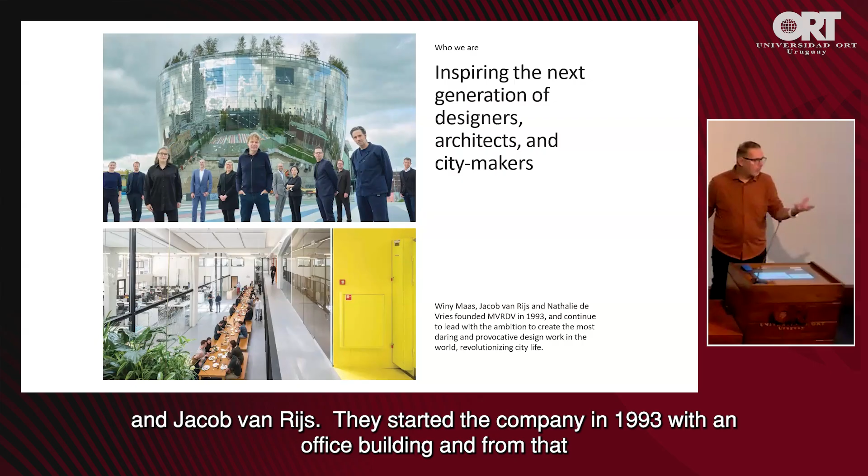MVRDV stands for Maas, van Rijs, de Vries. It's an acronym for the 3 people that you see in the front: Nathalie de Vries, Winy Maas, and Jacob van Rijs. They started the company in '93 with an office building. And from that, now 35 years later, or 33 years later, we're a company still based in Rotterdam.

And we try to design green and innovative spaces, creating happy spaces and adventurous places for an ever-changing world. And we do not only say houses, but we actually work on all scales, from private houses to big urban plans.

And we do that with a large team, of course, with around 280 people from 5 offices. Our main office is in Rotterdam. We have a small office in Berlin of 30 people, an office in France of 20 people, an office in Shanghai of 10, 15 people, and a very small office in New York at the moment where actually only 2 people are sitting. And that's the one that I hope to grow, as I'm working in that region.

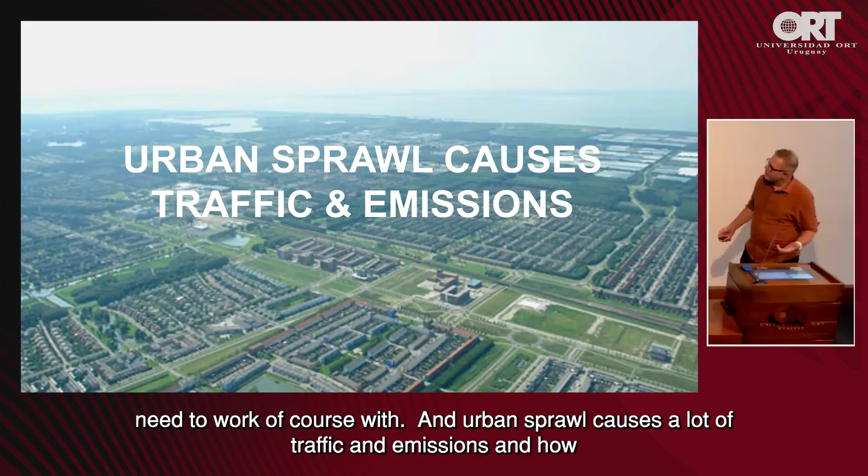Some of our design philosophy: we are founders born in the 70s or in the 60s. So we know about the Club of Rome, where they already said in '69 that we're seeing the end of the resources of this world, and that is something we need to work with, of course. And urban sprawl causes a lot of traffic and emissions, and how can we combat that? We are firm believers that cities are an answer, and we're living in cities, one of the answers.

But of course, that creates density, and it is sustainable, but it's also very stressful. For everybody who read Delirious New York, this is, of course, a very recognizable image, where already there was the utopia of living inside a city but in a different way. And we're thinking, how can we do that, and how can we do it differently?

But we also should be aware that we're working in an industry that actually is responsible for 1/3 of all the CO2 creation in the world. And what can we do about it? Of course, we cannot help it on our own, but it's something that we want to see how can we help. And that's why we're trying to be sustainable.

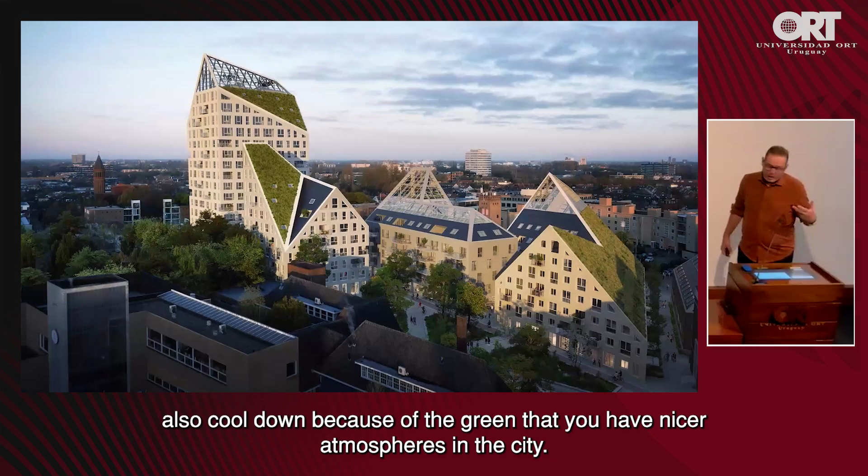We adapted the sustainable goals of the UN. And of course, we as architects, we as builders, cannot do everything, but we can always look at what we can do. How can we make our buildings greener? Can we make sure that our cities become greener so they become nicer to live in, but they also cool down because of the green, so you have nicer atmospheres in the city.

But also looking at the carbon reduction: this is a project that we did in Brussels, Belgium, where by reducing the carbon and changing the structure from a full concrete structure to a hybrid construction, we reduced so much weight that we could actually reduce the piling underneath the building. And with this reduction in piling, we actually saved enough money to pay for the wooden floors, to pay for the hybrid structure. So actually thinking about carbon can also be something that helps you pay for your building.

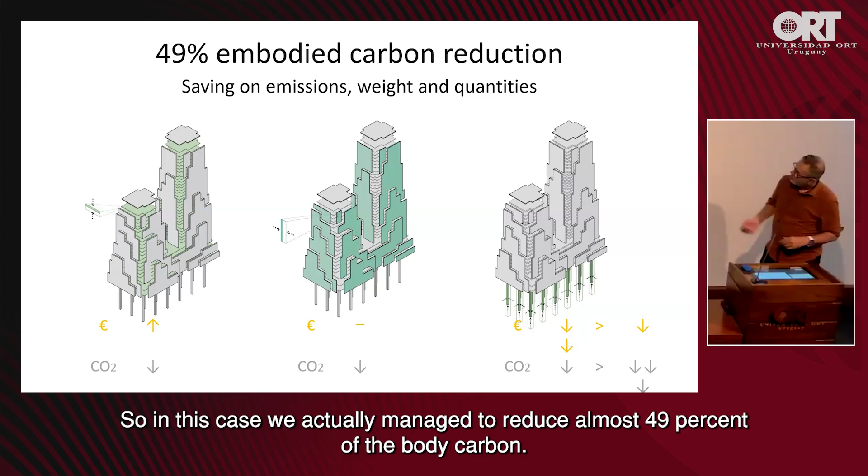In this case, we actually managed to reduce almost 49% of the embodied carbon. And that's why also we have a group in MVRDV called MVRDV Next. Together with them, they do a lot of programming, computer science, data-driven design.

Together with them, we made the carbon guidelines. What we're trying to do is make people aware in our office, where is the carbon? Is it in your floors? Is it in your columns? During the design process, already from the first sketch till the end, we put our design into the carbon calculator. It's a calculator that calculates the amount of carbon in your building, and then you see where you can optimize it.

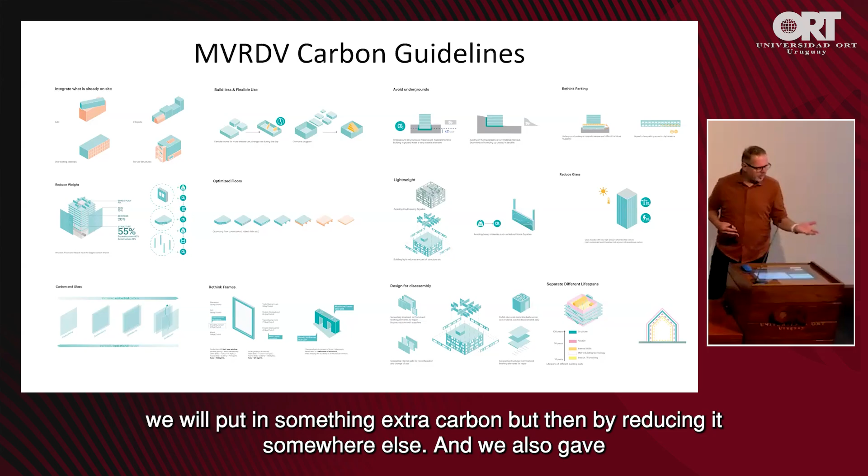Because we're still architects, so we still want to design buildings. So sometimes we will put in something extra carbon, but then reduce it somewhere else.

We also gave ourselves a target. Before 2030, we want to have less than 400 kilos of carbon per square meter in our building. That is also to make sure we reach the Paris Agreement. We're not there yet, we're at the moment at 469. But every year we're going down, and we calculate all our buildings to also track that.

We're also starting to publish this data online, so that everybody can follow us and see how we try to reduce our buildings.

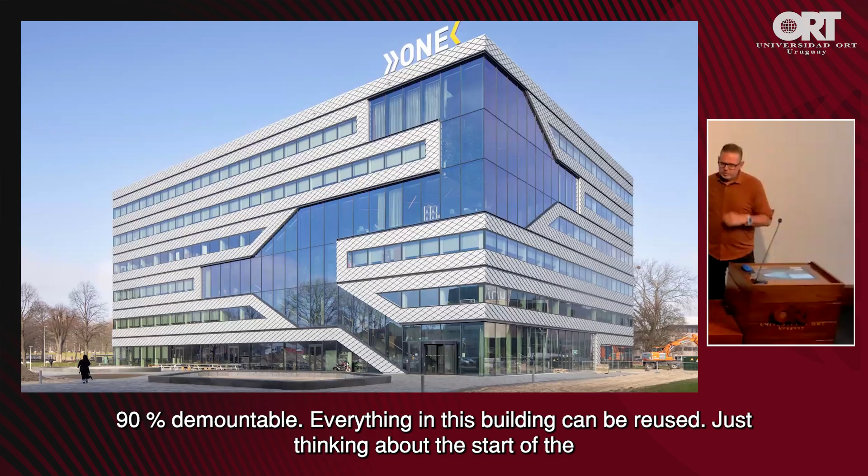Another way we're doing that is, for example, this building is 90% demountable. Everything in this building can be reused. Just thinking about the start of the building, we started to think about, can we use bolted steel instead of welding steel. The floors are actually loose on top of the steel, and they're only held with clamps. The whole facade is screwed onto the building.

All the grid is a standard grid, standard element, so that in 30 or 20 years, when you take it apart, you can actually demount it. It's one product, and you can use it somewhere else in a new building. So already thinking now about what you're going to do in 30 or 50 years with your building, but also with the installation, for example.

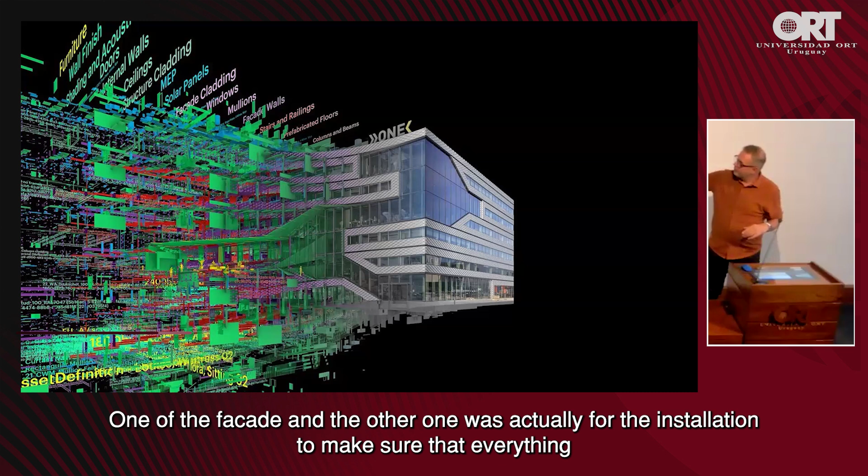This is a laboratory building that can transform into offices and vice versa. We actually made two mock-ups for this building, one of the facade, and the other for the installation, to make sure everything was visible, nicely designed, but also easily accessible, so people could easily change a laboratory into an office or vice versa without constantly having to open ceilings. So from the beginning, rethinking how a building like this works, but also how the lifetime and lifespan of a building works.

Another study we're doing a lot on is resiliency. We did a study for Vancouver, but also for the Bay Area in San Francisco, thinking about how we make areas resilient for water rise, sea level rise. We actually made a small book about that, the Sea Level Rise Catalog, where we put all our information.

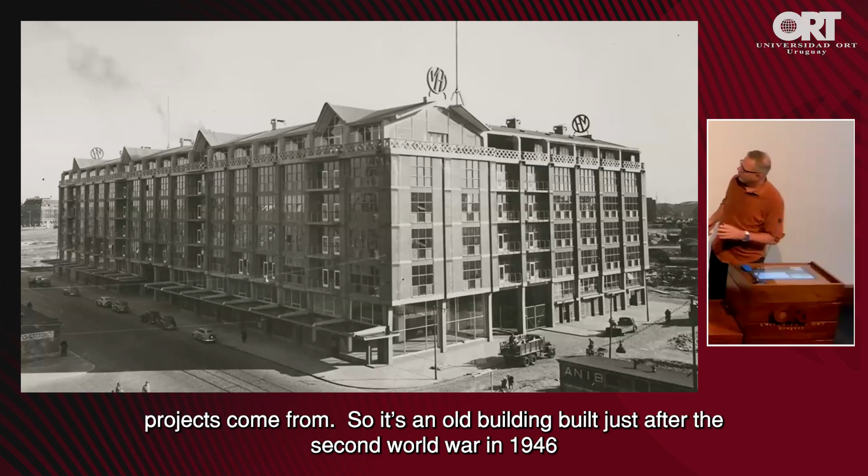So, what is that? We're working from the MVRDV office. I thought it would be nice to show how our office looks, that maybe also explains a little bit where our projects come from. It's an old building built just after the Second World War, in '46, designed by famous Dutch architects Maaskant and Van Tijen.

We're occupying the 5 wide buildings you see in the middle. So it's one big building, a mixed-use building where a lot of small companies were. On the top, there were actually people living in the past that maintained the building. When we moved in, these were actually factory floors, and we transformed it into an architectural office.

So we have 3 spaces. The white space is our working space, where we have our tables where everybody sits, and our computers. Then we have the middle, that's the family space, where we have lunch every day together.

So it's a long table where from 12 to 2 everybody sits down, has lunch, to actually meet each other, to see each other, and to hear what people are doing. What project are you working on? You're doing something in Asia, I'm doing something in the Netherlands. Can we learn from each other? Can we make sure that we exchange?

And to further that, we have this tribune inside our office where every month there is actually a Pechakucha where the youngest student needs to present the project. So if you as an intern come to us, you work on a project, once a month you need to present that project to the rest of the office. What is very interesting, because you're actually being trained to present your ideas, to present the ideas also from other people, because now all of a sudden you're presenting the work of somebody else.

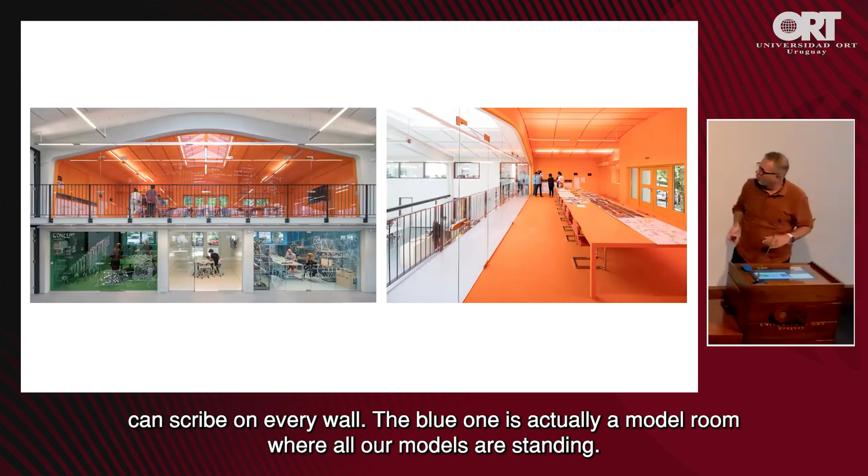So the third zone is the zone where all the meeting rooms are and where all the facilities are, and you see that these are very colorful. Every room has its own identity. This is one of the big meeting rooms, and in the bottom you see the smaller meeting rooms. The white one, for example, is a completely whiteboard, you can scribe on every wall. The blue one is actually a model room where all our models are standing.

And now let's go into some projects. I'll start with smaller projects and grow into larger projects. This is a project that we did in New York, where there's an interesting building next to the Hudson River.

The interesting part of this building is you can drive into the building with your car. You go up in an elevator, and next to the elevator there is your house. We were asked by the owner of this penthouse, and he said, I have this penthouse, but it really doesn't function, it doesn't work. I have my living room on the ground floor, I have my bedrooms on the top, but I have 2 balconies that are connected on the top floor. How can we change this, and can you get rid of this huge stair that takes so much air?

What we did here was really rethink the layout of this apartment, just flipping it. So having on the bottom floor the 2 bedrooms, and on the top floor creating the living space, so that you have a much more open space. And one of the things that we did was introduce a new stair.

So when you step out of the elevator, you walk onto this glass floor where underneath you have the stair that goes down. And you see this glass railing, and there's something special with it, because one of the demands of the client was that I want to have a separation when I have a party between my living room and my private bedrooms. And how can we do this?

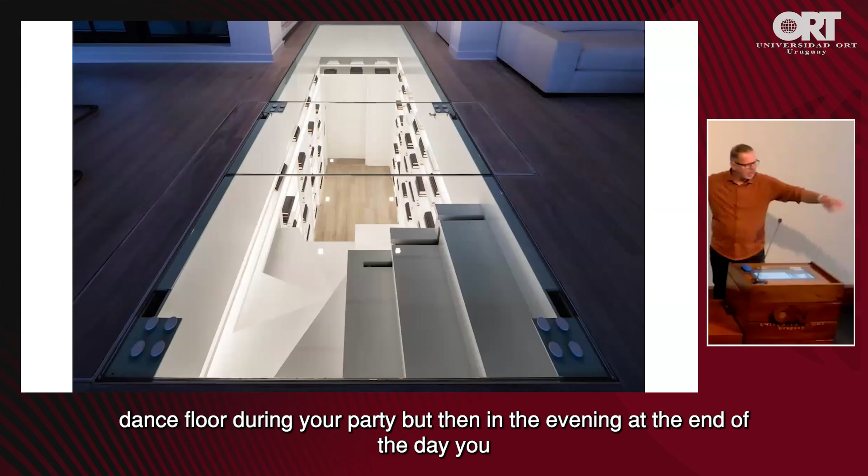So what we actually designed here is that this glass can fold down. So you have a fantastic dance floor during your party, but then in the evening, at the end of the day, you want to go back to bed, you can open it, and you can take the stair down.

And you see here, this is the new living room that we created for him, that is more open, more bright, and connected via this terrace. And then if you walk to the other way, you see the kitchen with a second living room, also connected to the other terrace on the other side. If you go down the stair, you come into the bedroom, behind his and hers clothes. Underneath you have the bath, and then the bathroom.

And then we included also a very small private family room that takes use of this double high space that we made a lot smaller. The idea of this project is really that we were asked, can you rethink the layout of this project? That's what I tried to show in the project we have there, where we were asked, we have a problem, can you try to help us solve this? And that sometimes means thinking outside the boundaries of the current confinement.

That's also what we did here for the Didden Village, a very small project, but very nice, very significant, where we were asked by the owner of this building. He has a workshop on the second floor and the ground floor, and he was living together with his family and at that moment 2 sons in one big room.

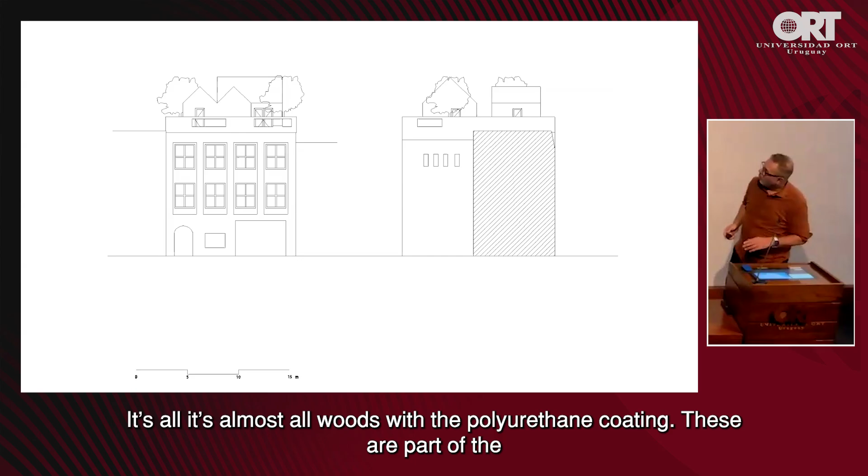And what we did is we actually prefabricated everything. So we made a small extension of this model, and all the elements were prefabricated and were hoisted inside their house, to have a very minimal impact on the city and a very fast construction. It's almost all wood with the polyurethane coating.

These are part of the drawing set that we submitted to the city because we needed to get approval, of course. The only thing that we showed on the drawing was the colour number, RAL 5015. We didn't show that it was actually sky blue. So the first time that we started putting stuff on the rooftop, people in the neighborhood were like, why are you extending the house with a blue rooftop building?

The nice thing is, a year later when we came back, everybody loved it. It became part of the neighborhood, and this changed the way people were thinking about their own rooftop. People were now actually living on or doing stuff on their own rooftop. And we cleaned up the house.

So you see, this is now the ground floor, and this is one of the two staircases going up. This is the staircase for the children that has not only the two staircases, but also the hidden part for the children to climb and slide down. It comes up in their small house with two rooms.

Then, later, they move downstairs or move on. They have the beds, and because they were always living together, we wanted to make sure that in the evening they still could have contact. So we also made two windows that could open to each other, so if they still wanted to sleep next to each other, they could actually crawl into each other's bed.

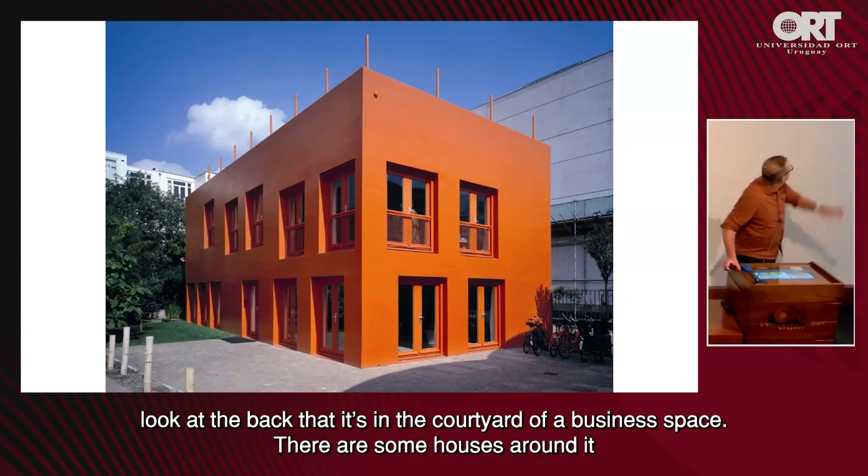I said no problem, because this was also, if you look at the back, in the courtyard of a business space. There are some houses around it, and they started complaining. They really hated the orange, and said, I cannot live in my house anymore. Every time I look outside, I see this orange monster.

We actually came on national TV. They discussed this project, and it was quite an outrage for such a small building. And then we said, okay, we can change it, not a problem, but what do you want then? What kind of color? So we did a survey, and people could choose.

Not unanimously, but they chose, let's turn it into green. And everybody was happy with this, because somehow this worked with the neighborhood, it worked with the plants around it, and this is what the neighbors chose above the orange.

On the ground floor you have the studio, and then if you go up, you have the house with the living room on one side, and on the smaller side the bedroom, and then on top a nice outdoor space, and around it a nice space to play outside, also for the children, but also for the people in the studio.

Another small project is where the client came to us and said, I want to have privacy in my villa. I want to have a villa, but I want to make sure that nobody sees me, and I want to have a lot of glass.

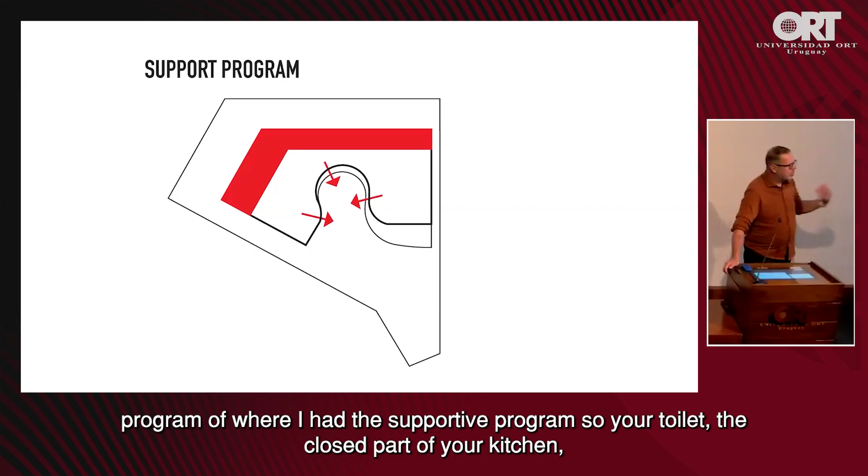So we said, yeah, okay, that could be. What we could try to do is close the outside wall, and first have a program of the supportive spaces. So your toilet, the closed part of your kitchen, your entrance, your garage, we all put that on the street, and then we open it on the other side.

So this is the plan that you see. You see the wall with all the utilities inside, the garage, and going up you have the bedrooms. From the outside, this was of course a huge discussion point, because the city said, look at the other houses, it's all fake, but it's all in the style of the 20s, so why can't you do this?

So we actually provided a lot of modern architecture from the 20s that were also just with a flat roof, not a pitch roof, with simple brick work from all over the world. And the city, in the end, said yeah, okay, we understand. So they approved that we could build this.

So we actually, there's only one window, and then this Brazilian lattice brickwork that also hides a window. And in this curved wall, there is a door. So you move in here, and then you step into this wall, and through the wall into the living space in the library.

And then you see that this house is actually concentrated around an olive tree of 400 years old. The client was Greek, and she really wanted to have this olive tree. That was her pride and joy, and that needed to be the center of the house. So the glass really curves around it, and it's closed on the other side, but it's really open on the inside.

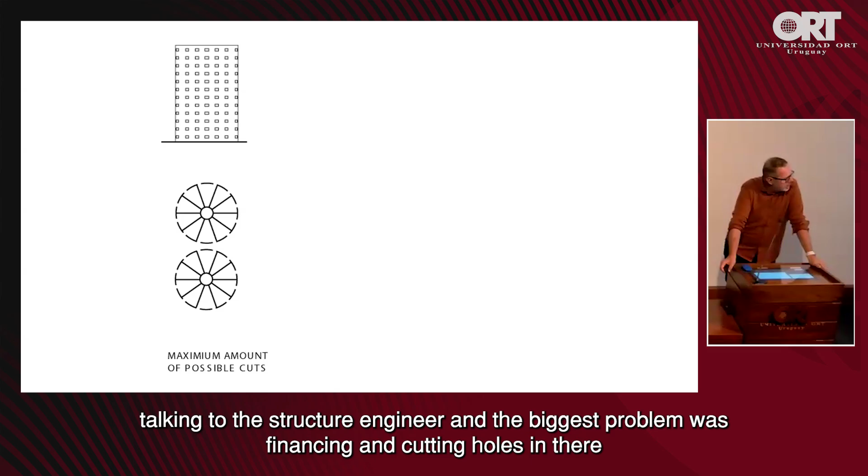But we started talking to the structural engineer, and the biggest problem was financing and cutting holes in there. We could only do very small holes, and if you look at the amount of square meters we could make inside, they couldn't afford actually cutting those holes. These walls are a meter thick, so expensive that you would get portholes, and that wouldn't work with the housing inside.

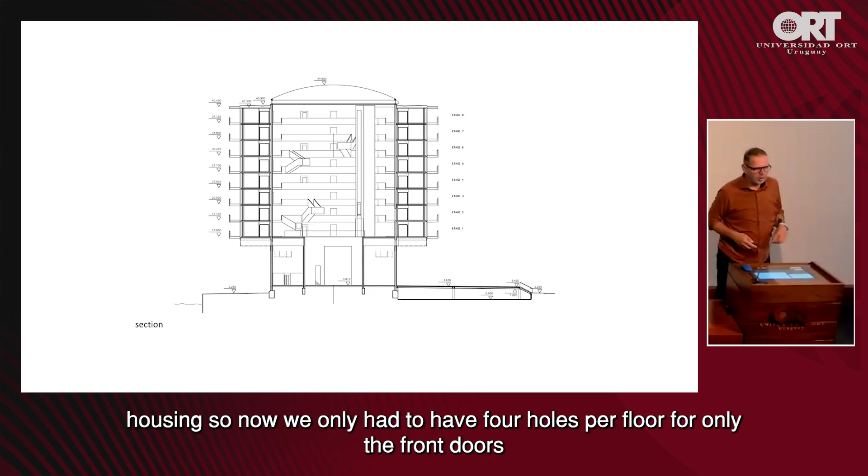So we thought, okay, can we not turn that around and try to flip it to the outside. So what we did is only make a couple of holes on one level where we stick out beams through the structure, and on these beams we actually started building the housing. So now we only had to have 4 holes per floor, just for the front doors, because we made this fantastic ring of housing around the buildings that were just hanging on this concrete building.

And then we could actually make more square meters, nicer square meters, because the nice thing about this was that all of a sudden it's not a small window, but you can have a full curtain window for your house. And you have this fantastic, nice living spaces. So they could also rent or sell these houses for a much higher price.

So actually the project almost paid for itself. And as a bonus, we got this fantastic interior space for free almost.

Another project is Silodam Amsterdam, and it's actually nice. So, does anybody know this ship?

Then the question is what has this to do with housing, and especially the Silodam. This is the Silodam. As you see, it's on the water, so that maybe helps a little bit. It's built in 1995, started construction in 1994, 1995. The whole idea of this building was that it's almost like a ship of containers, and every container is like a mini neighborhood. What we did is, before we started talking to the client, we designed mini neighborhoods with different types of housing.

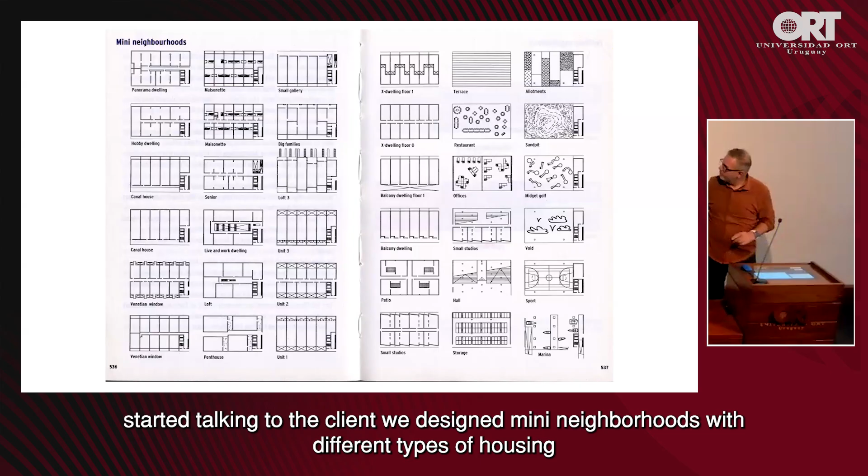We came to the client and said, looking at your wishes for square meters of apartments and the differences you want, and also wanting this mix of affordable housing and condos, social housing and condos, how can we do that? By having this mix of different units, we could work on this.

Every time the client said, no, I don't like these apartments, let's take them out because they don't bring enough square meters or they're too big, we could bring in another block instead.

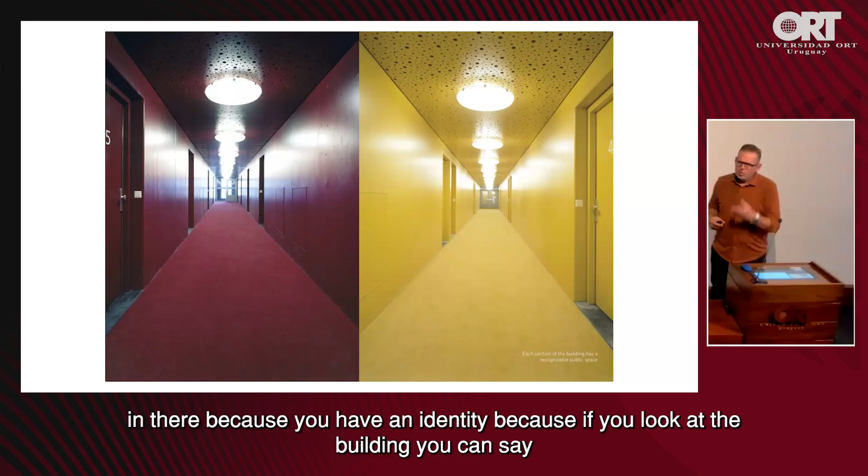Every block also had its own color, its own facade, and its own interior corridors. This way, everybody feels at home because they have an identity. Looking at the building, you can say, I live in the orange block, or I live in the red one.

The big advantage is that inside the building we now have houses ranging from almost 50 square meters to 200 square meters, so we have a bigger range. It's not only social housing, it's also a five-room apartment.

We also have different types of connections toward the front door. This one is a gallery entrance, leading to a bigger house of 120 square meters. We have smaller ones around 50 square meters. All kinds of different houses, different layouts, different amounts of bedrooms.

Another thing we did, which I think makes it really special and very flexible, is that we have a couple of concrete walls, but for the rest we just have small concrete columns.

What we tried to do, though we didn't manage it 100%, is put all the electricity and switches in the concrete elements, so that all the walls in between can be flexible. You can take them out, remove them, or remodel quite easily.

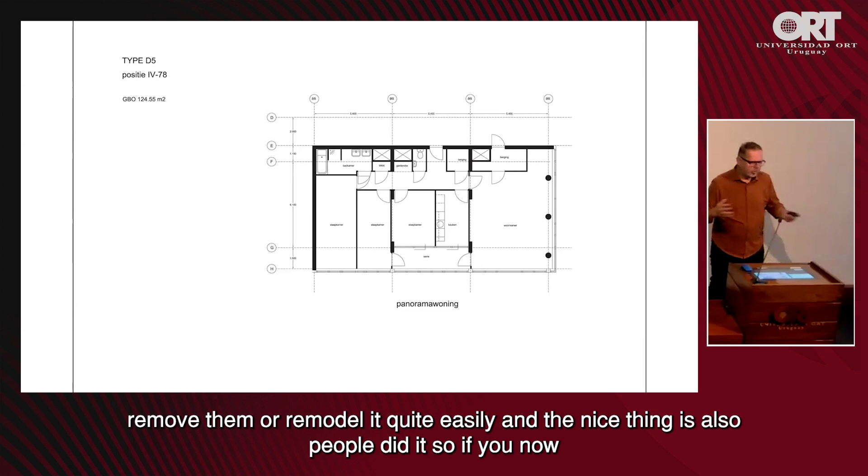The nice thing is people actually did it. If you go there now, except for one group, an elderly group living in rental houses whose homes are still the same, all the other houses have been changed. Walls have been taken out, people put in bathrooms at other places. It's really interesting to see how giving different facades, different options, and different apartments made people start living differently inside this building.

As I said, it's on the water, and you go in via the stair onto the building, and then on the other side, one of the blocks is sticking out of the building. But that still doesn't explain what this has to do with this building.

We started building this in '94 or early '95, and one of the first things the contractor said was, we have to sail Amsterdam in '95, meaning whatever happens, I want this part of the building finished.

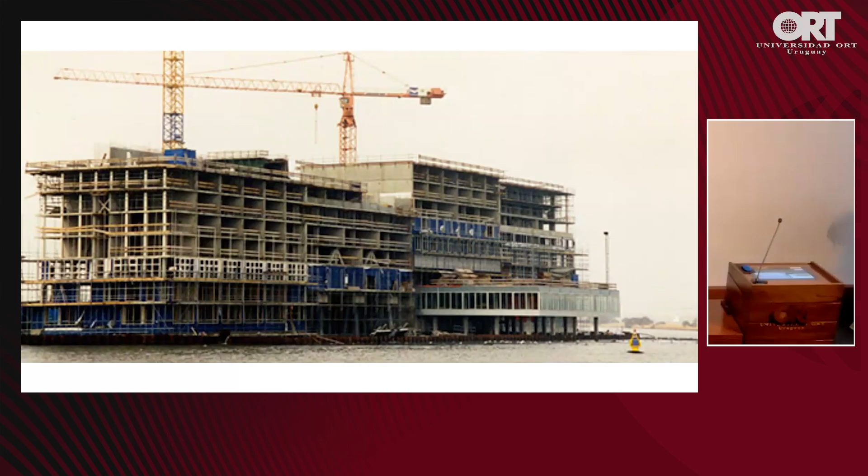Sail Amsterdam, I was just there two weeks ago, and that's where I saw the Captain Miranda. It's an event every 5 years where 50,000 boats and 24 tall ships enter Amsterdam, from IJmuiden to Amsterdam, a week-long event where all these ships sail into the city.

It's a fantastic idea, and the client thought it was also a fantastic opportunity to host all these people on this building site. That meant we started thinking, all of a sudden this isn't just a viewing platform, it becomes an event space almost. Maybe we should do something about it.

I'm glad we did, because I was there last week, and you see this is the building, how it looks now. It still looks fantastic, but they used every square meter of the building as a viewing platform.

Especially on this platform, at a certain moment, since I still have contact, I got a phone call from somebody asking, do you think this is still okay? Because there are so many people there, won't we have a problem? I said no, we knew this was going to happen, so we took care of it.

It's interesting to see that because of a location or an event, sometimes we have to think ahead, because things like this can happen, and you make sure it's also a safe space. I must say, we didn't count on so many people on the roof.

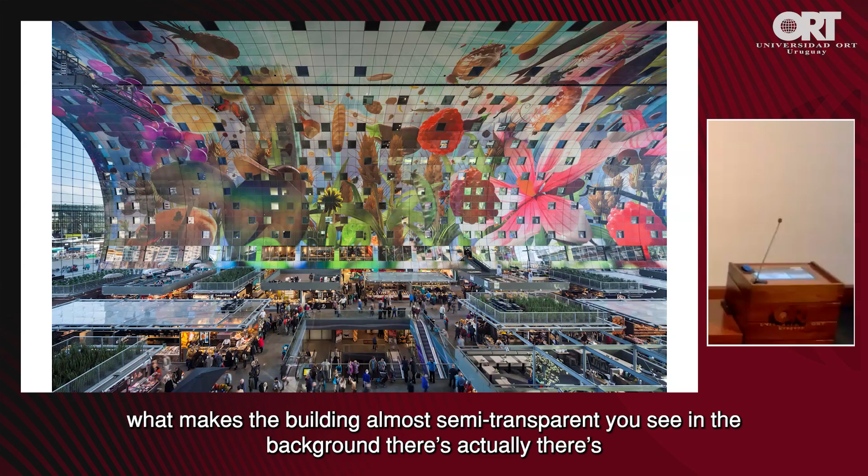The inside is covered by this huge mural artwork, the cornucopia, that represents where all the wealth comes from, all the fruits. The nice thing is you see shrimps that are 400 or 500 times enlarged, you see flowers, but also if you look closely, it makes the building almost semi-transparent. You see in the background there's a crane standing there, and that represents Rotterdam, that's always in development, there's always new buildings coming.

But you also see lines that represent the floors and the walls, because behind this mural are actually what makes it the market hall, the houses. So in this building we have 228 houses, where half of them are rental and half are condos. And they have one side that looks outside, and the other side that looks inside.

And what we did is we looked at it and developed four types that repeat each other and then step back. Sometimes they stack, and sometimes there are small differences to make the facade a little bit more interesting. But basically it's just these 4 blocks that constantly repeat.

That means people can look on the outside, but they also can look inside the market hall. In the beginning, we actually wanted these windows to open, so that you could really scream downstairs, 'Can I have something?' and they put it in your basket. Luckily, the client didn't allow us, and that's good, because now when you're in your house, you don't smell anything, you don't notice anything from it. You can look at it, but you don't have the pollution or the smell of it.

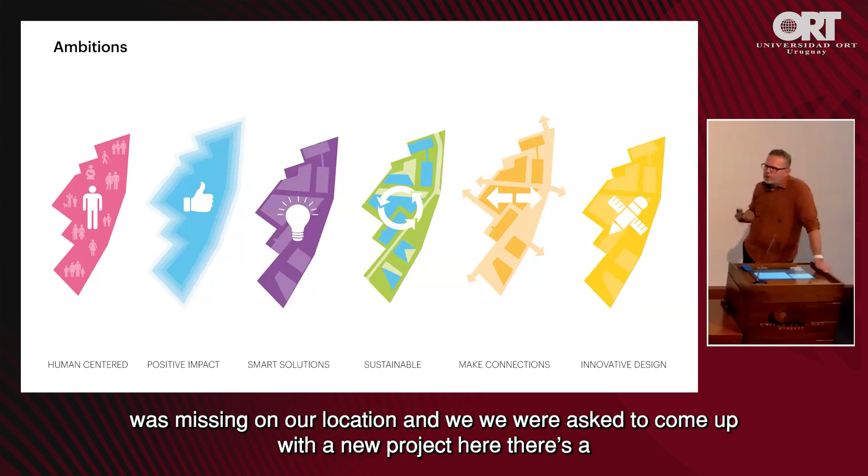It was a competition that we presented. So we looked at the ambitions that were there, we looked at the urban structures. But one of the things we wanted to do was make a very nice urban life. So what we did here is try to have as much daylight on the street as possible. We looked at the sun angles and cut the roofs 45 degrees so that we lowered the buildings at the street levels and have more daylight on the streets.

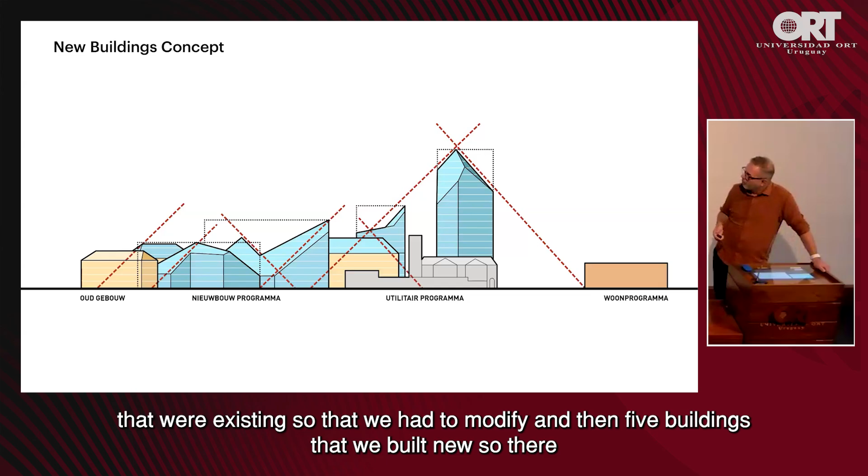That has an effect on the building volumes. So number 2 is what you could build, but if you start cutting, then you end up with building 6. We did that for all the buildings that we could do there. There were 2 buildings that were existing, so we had to modify those, and 5 buildings that we built new, so there we had more liberty.

Half of the roofs that we created are solar, and the other half are green, adding this element of green inside the city again, with the benefit that we lowered it so much that you have daylight in the streets. In these small streets it feels like the houses are not that big, but from a distance you see that there are bigger volumes. And from the other side, you see all the green roofs that we're creating.

We're almost done with this. These are 2 of the buildings that we renovated. Did the whole interior. Ground floor is going to be retail, and above it's housing. We recreated the passerelle that was there between the 2 houses, which is also the entrance to the two houses.

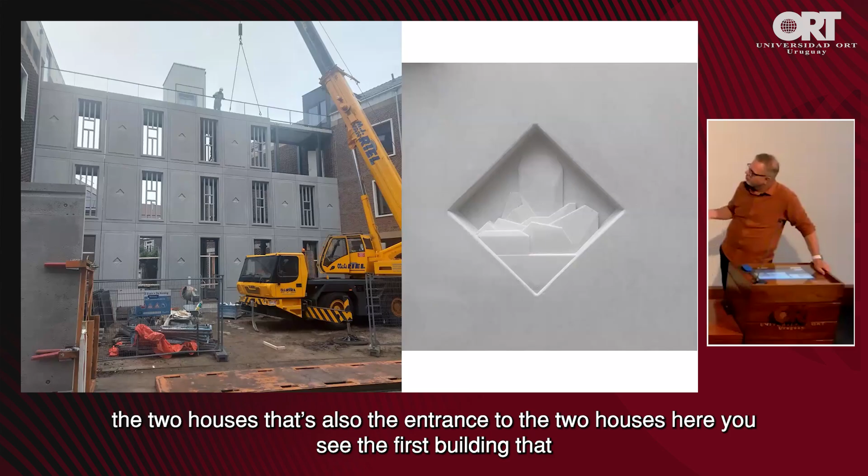Here you see the first building that was delivered a year ago. So we first did the first 3 buildings. This is the roof, the green roof.

This was after a year, so you see now that the plants really came alive. When they first put on the roof, you're like, oh, this is not what we agreed upon. But yeah, it takes a little bit of time. They need to grow the plants, but this is how it looks now. And before the end of the year, we hopefully we're done.

The Valley, it is in Amsterdam, and this project was really on the edge of the commercial zone, the office zone of Amsterdam, and the new housing. Our building is a mix, so there's housing in it, offices, retail, restaurants, and we thought, how can we work with that? So this was the base volume that we got, 3 towers on the plinth.

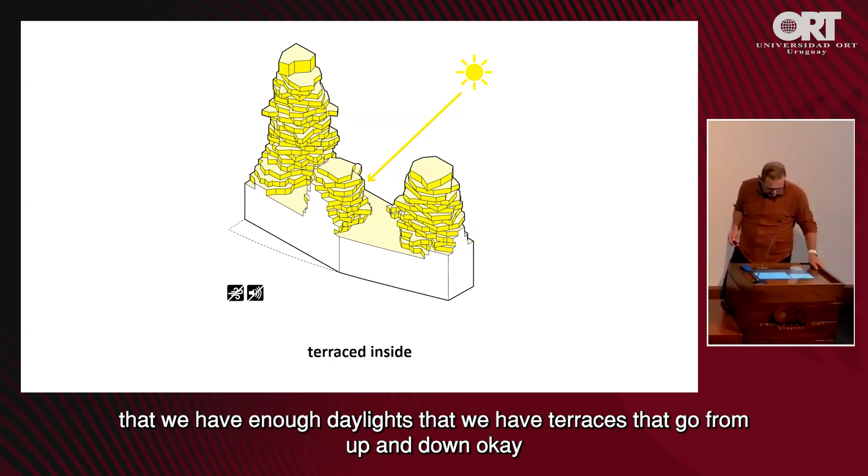We said okay, on the outside it matches the offices that are there, but on the inside we should start breaking it down and start creating terraces for all the apartments that are there, making it feel like a housing block. And also making sure that we have enough daylight, that we have terraces that go from up and down.

That we have an active plinth. We created a grotto that combines everything, and one of the nicest things that we did is we actually made a public route that goes over the building all the way to the top and down again. And this is a public route that is open 24 hours a day, where people can just walk up in the building. And then also we have a sky bar.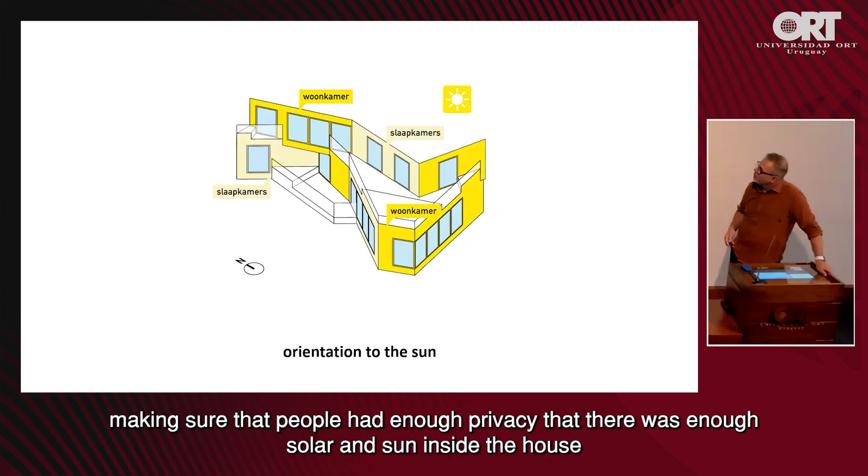But the nice thing about it, of course, we want for the facade, we wanted to create diversity, quality for all these houses, making sure that people had enough privacy, that there was enough solar and sun inside the house. So that had to do with the windows, but also the orientation of the moves of the facades. We are next to a highway, so we also want to make sure that we would block as much sound as possible, really creating this nice environment where people could live.

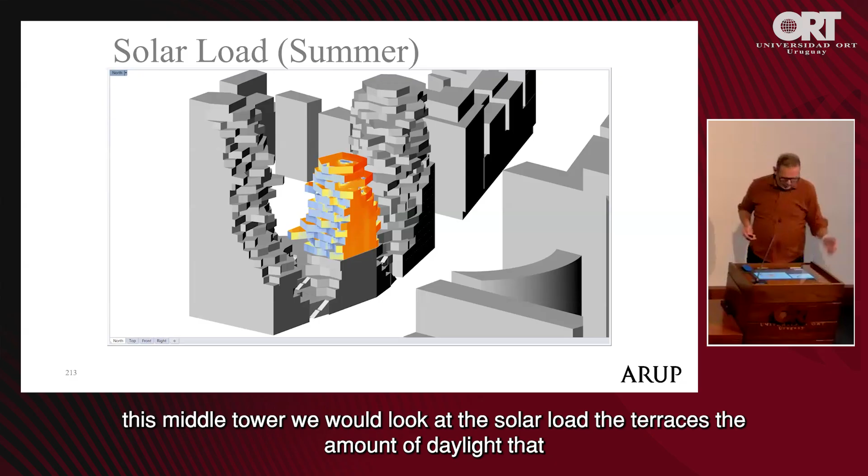So with this project, we did a lot of scripting, parametric modeling, what we now would call AI, but parametric modeling, where if you look at this middle tower, we would look at the solar load, the terraces, the amount of daylight that went in and out, and we did a lot of tests.

We did really a lot of tests, and the colors, this is then generated by the computer. The colors tell you how good or bad something is. So the redder it is, the lower the score, the greener, the better the score. So with this, we could actually quite easily optimize all these angles for sun, for solar, for wind, all these elements. And that led then in the end to all these plans for the first tower.

And we did it for all the blocks, interlocking of course. And that created then in the end this block. This is on top of this route, that is this public route is there. You see the 3 towers, but you also see the facade.

And the nice thing about this natural stone facade, actually, it's a waste product. If you look closely at the facade, you see that it's not homogeneous. It's something that we liked and we chose for it, but this was because the stone was not one color, there were small holes in it, different colors in one stone. We got it actually quite cheap because they were going to recycle it and put it under the roads, and we turned it into a facade. And also here we looked at parametric modeling to optimize this facade.

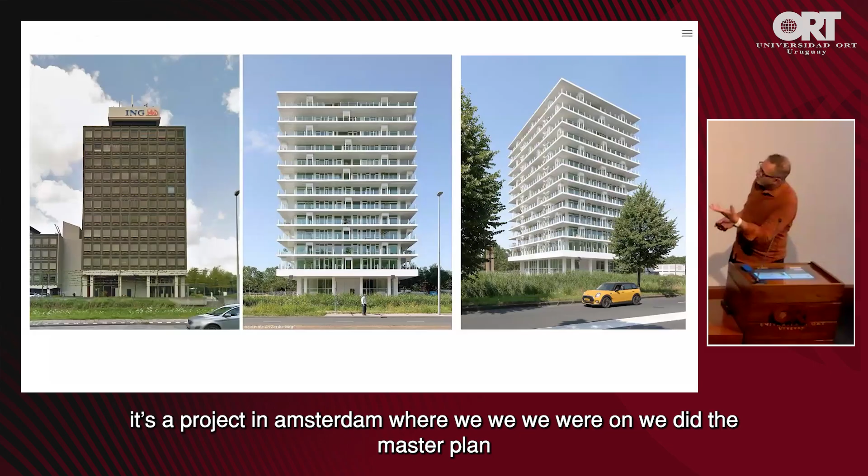Maybe I skip this one for a moment, because it's a project in Amsterdam where we did the master plan. We renovated this building, and we built a couple of new buildings.

The nice thing was, and this is again rethinking the question of your client: there was a design already of 4 different architects, 7 different buildings, but the time changed and they couldn't afford it anymore. And then we were asked. They already had a plan, and they said, okay, we do just 5 buildings, 6 to 8 apartments per floor, very efficient. Can you redesign the facade? And we said, yeah, that's nice, but what is your question?

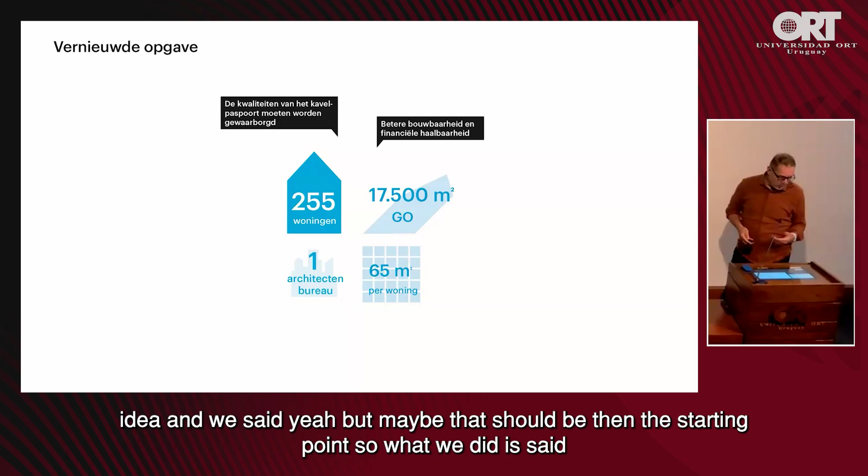What do you actually want here? And he said, yeah, no, this is the program. We want 65 square meter apartments. We want to have 255 apartments, and we want to have as many corner apartments as possible because that will actually rent out easily. So that's the idea.

And we said, yeah, but maybe that should be then the starting point. So what we did is said, okay, what if we just make corner apartments? Make a small block, four apartments per block. Cut them open so that becomes your corridor, where the stair is, where the elevator comes out, where you go into your apartments, and we can still do something then with the building.

So we give the window frames different colors. We work with the balcony so that they look not all the same. We add French balconies not only for sound but also to break up these facade elements.

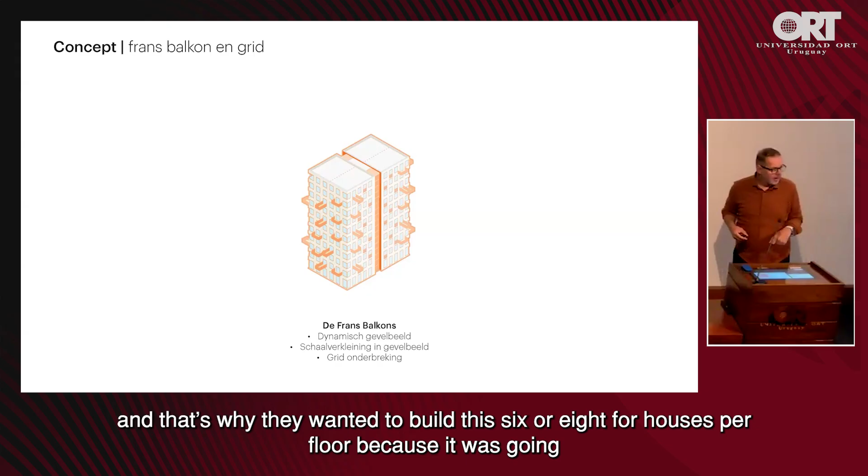The other thing that we needed to work with was a very low budget. That's why they wanted to build this 6 or 8 houses per floor, because it was going to be cheaper and easier. But by actually designing one building and repeating it 7 times, we came out fractionally higher than the original budget, but the quality of the houses was so much better that looking at their investment model, by renting this out, and this is also what they're going to own for themselves, in the long term, this is just a much better product that they can rent out much longer.

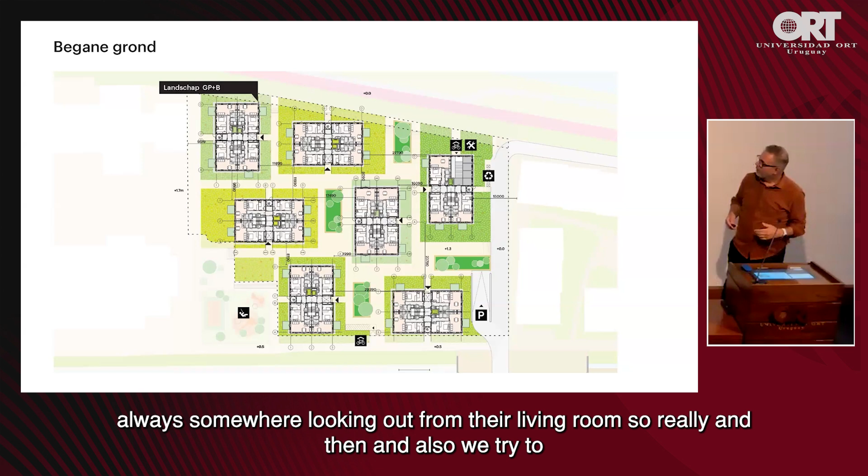All the houses have quality, doesn't matter if you're in the middle, they actually have a long view, always somewhere looking out from their living room. So really, and then we try to optimize actually the space around it.

Because this is an investor park, it needs to be green. We try to make it the greenest plot as possible. We work with a landscaper. I will skip this for a moment. That's also interesting, we work with a group specialized in...

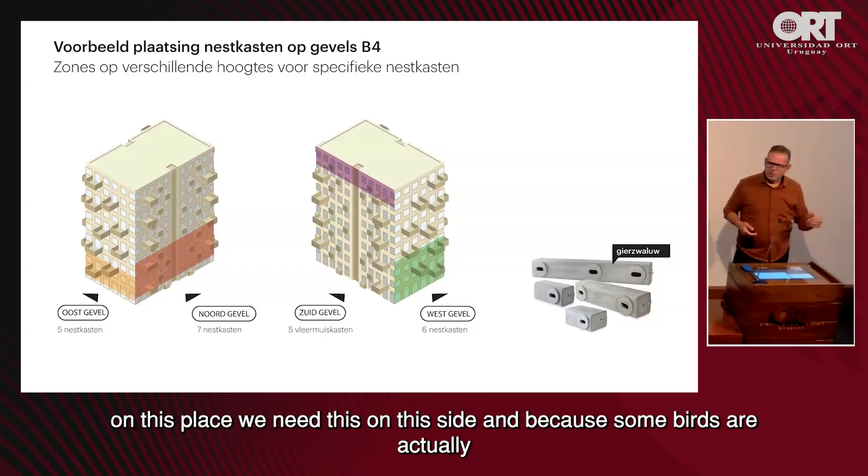Fauna and birds, because we as architects of course know how to integrate elements, but where do we actually put these birds? Where do you put the swallows? So we work with a specialist who told us, okay, we need this on this place, we need this on this side, because some birds are actually solitary, they want to be alone. Some birds want to be together.

And to make sure that all the buildings are a little bit different, we chose 4 different bricks in 3 different patterns, and then different colors for the window frames, therefore making all the buildings a little bit different, but also still the same. And that's why we could make them affordable and easy to build. So this is how we presented it to the city.

And this is where we are now. If you look closely, you see here all these grey boxes that are actually bird houses, bat houses. They're all integrated into this facade at all the different levels. So really trying to optimize it, not only for people, but also for animals.

Okay, I need to skip this, otherwise... This is a project in Boston for the Research Enterprise Campus housing.

This is a nice project also, because this is something you don't see that often, and that is where our client was actually the Giants, the baseball team.

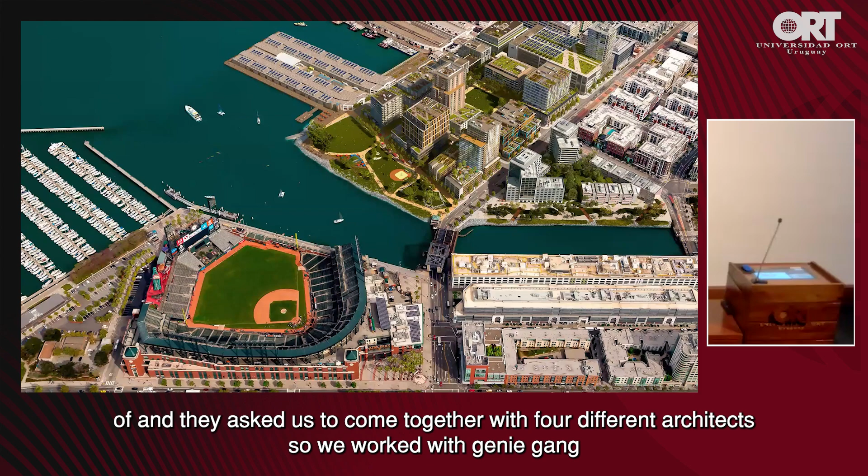They asked us to come together with 4 different architects. We worked with Jeanne Gang, WORKac, and Henning Larsen from the beginning on 4 different buildings at the same time. Instead of just designing on our own, we came together and worked in a studio in San Francisco once a month for a couple of days, talking to each other about each other's design commitments and goals on how we can improve this neighborhood. We turned that into a booklet, which was the starting point for our designs, but also for the other buildings that will come later.

We looked at how to make sure our buildings talk to each other, making sure our buildings are part of the same whole. For example, if I need a loading dock and you need a loading dock, let's put them opposite each other so that we minimize the impact on the street, making the street life better.

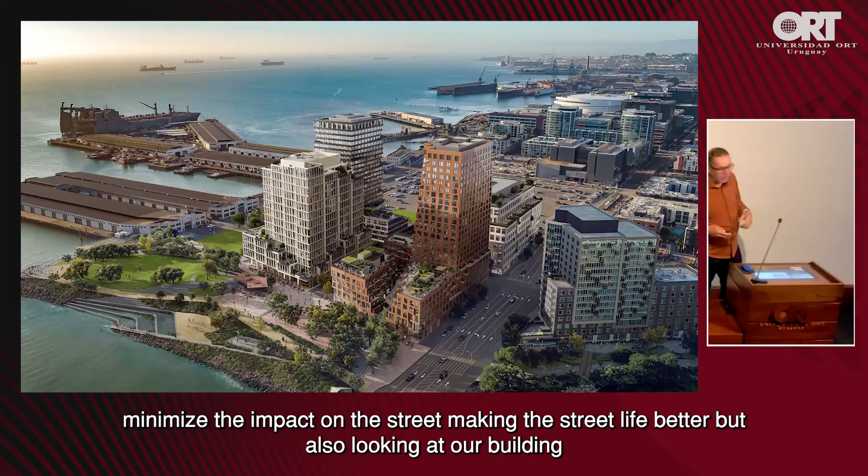But also looking at our building, the first block there - it's quite a big block, and we needed to do housing and offices. But of course, I cannot do housing in a plate this big, so I needed to carve it out so that it would actually have daylight.

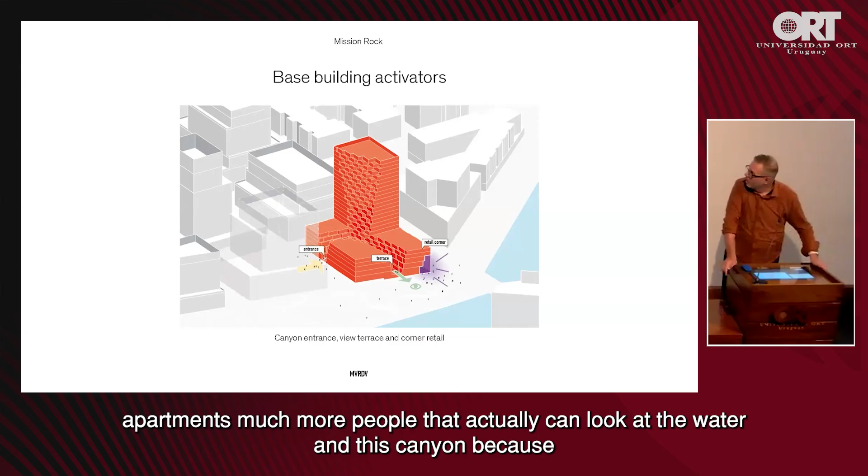I changed the tower because I didn't want to have the standard podium and slab on top of it. So I carved the tower so that it connected better, and it actually gives more views to the water. It also creates bay windows, and the nice thing about these bay windows is that instead of 4 corner apartments, I now have much more corner apartments, much more people that can actually look at the water.

And this canyon - another thing we found out is, if we're creating this new neighborhood, can we optimize the way we think about all the MEP? So in our building, we have the hot and cold water plant that uses river water to heat and cool all the buildings. Underneath this canyon there's the whole plant providing hot water for all the buildings, and the building next to us has a black water plant.

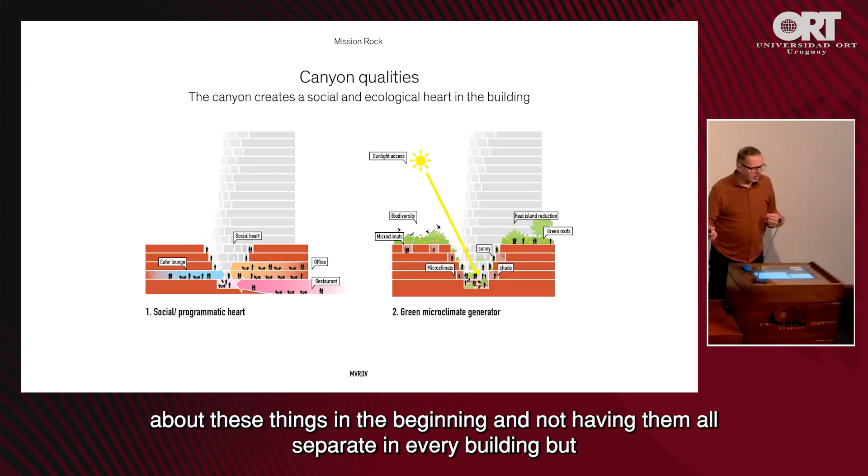All the toilet water goes there, is recycled, and then used for the plants in the neighborhood. By thinking about these things at the beginning, instead of having them all separate in every building, but concentrating them, we could make them cheaper, but also really work together with each other to optimize it.

So this is how the canyon comes down. And then for materiality, we really looked at the buildings in San Francisco, the colors, because we needed a darker or warmer palette. That's what we agreed among the architects, and we came to this GFRC sample.

Now here you see the building, and how it's now perceived from the ball game. The nice thing, of course, is this fantastic building on the water. Next to us is the Henning Larsen building, that's the office, and behind is the green building from Studio Gang.

That's also residential. How you approach this, you have the canyon where you also have the daylight coming in. The fantastic views from the top inside the ballpark are of course a fantastic bonus. And this is one of the shortest ways to get to the beach in San Francisco - literally a 5-minute walk.

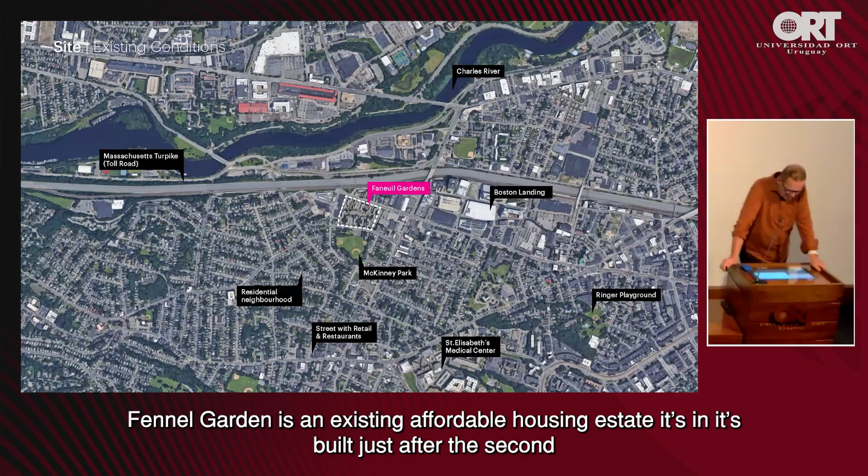This is a project we're doing in Boston, Faneuil Gardens. The nice thing about this project is that Faneuil Gardens is an existing affordable housing estate, built just after the Second World War for people that came back from the war. But in true American fashion, they just stamped houses out of the ground, every block the same.

This is really at the moment a neighborhood where the people living around it know it's there, they find it important, but they don't go in. That's just not what you do.

If we went there and started looking at who actually lives there, you see there are 258 households, but 74% of these households are actually single families with children - mothers with children, a lot of Hispanic people, a lot of black people living there. Then if you look at the social context, the average household income is way less than the people around them.

You also see that reflected in the rents - people pay 30% of their income in rent, so if you don't earn anything, you don't pay anything. But we tried to think about how we can turn this around.

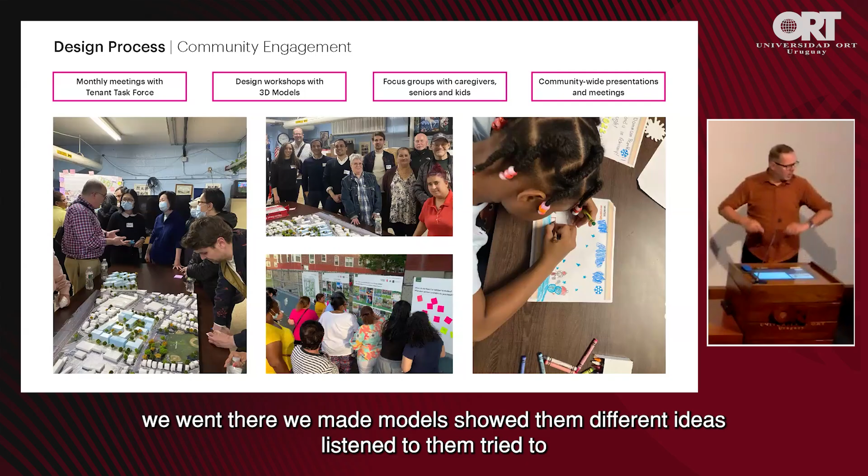One of the things we did is we went there. We made models, showed them different ideas, listened to them, tried to find out what they wanted. We made drawings, thinking about the good things and bad things of the current neighborhood, what they liked, what they didn't like.

With this, we created mood boards, we created ideas for them, communicated them, and let them design with us what they wanted. One of the big things we saw is that they want a connected neighborhood. It needed to be engaged with the bigger neighborhood around it, inclusive, resilient for change, and a future-ready community.

What we did is, seeing how many children and how many old people live there, we said let's make safe spaces. So we moved all the cars that were in between the buildings to the side. All the parking that was there moved to the side.

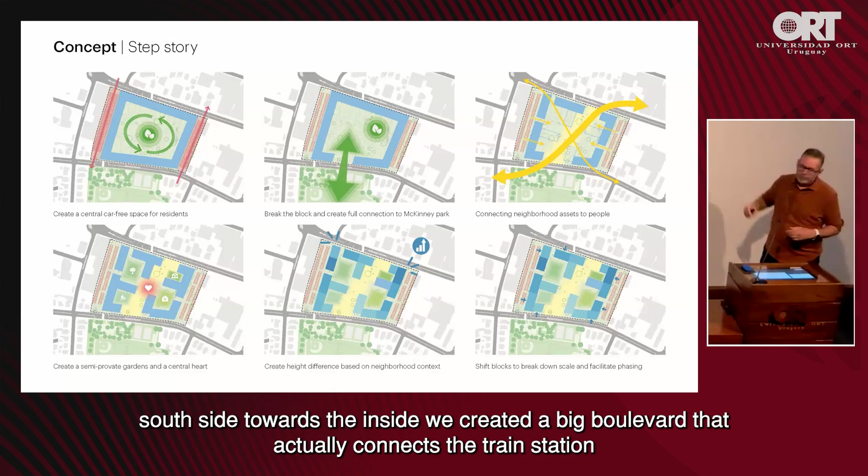We connected the park towards the south side, towards the inside. We created a big boulevard that connects the train station towards the neighborhood. This is now, or will be in the future, the fastest connection from the neighborhood to the bus station and to the train station. But we also tried to make it an attractive route.

So we went from the existing situation towards this. We are doubling the amount of houses. We make a fantastic connection. And we moved all the cars to the outside.

We also thought about the height. So on the train side, it's higher than on the small housing side.

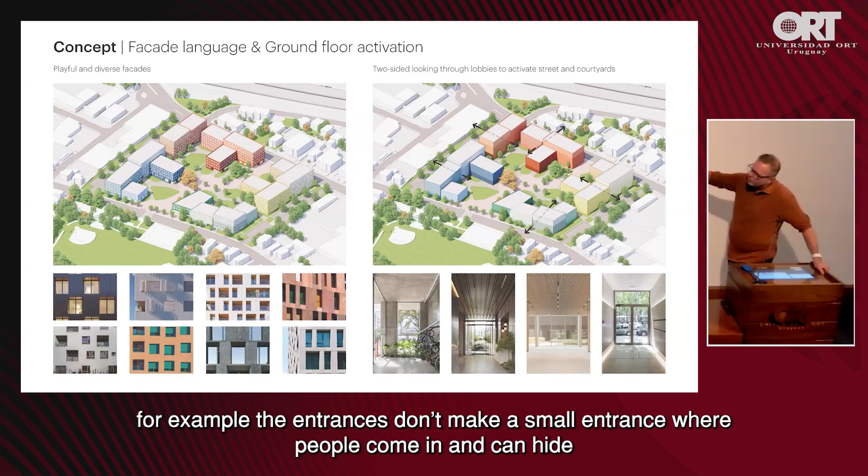We looked at colors, we looked at how windows could look, but we also made rules about, for example, the entrances. Don't make a small entrance where people come in and can hide, but make entrances that go from one side of the block to the other, so that daylight comes in and people see and meet each other.

That's very important. But also make sure that on the ground floor you have houses with a door to the outside instead of needing to go through a corridor. Why should they? They could just walk in from the ground floor directly. And make sure you make nice parks in between where people can meet and come together.

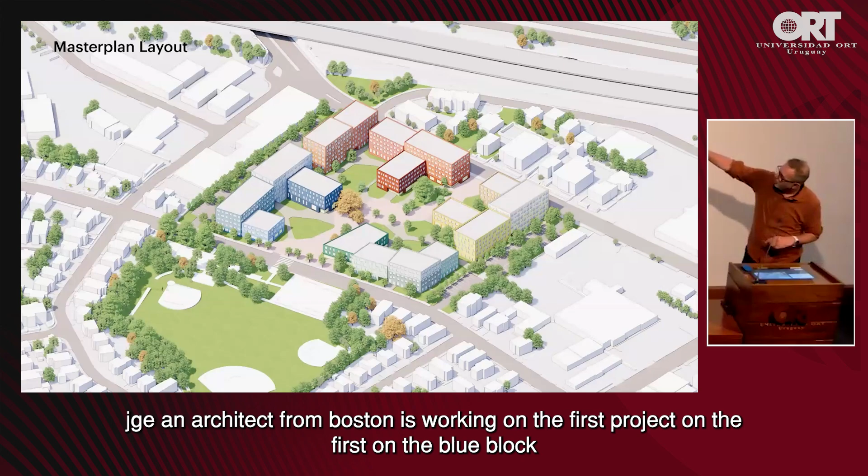So we turned all of this into a book as a guideline for the master plan. The master plan has been approved, and at this moment JGE, an architect from Boston, is working on the first project, on the blue block. We hopefully are going to do the community center in the second phase. But as master plan, we said okay, first somebody else should design a block before we start.

So these are some renderings that we made for the project, that is how we sold it to the city. This is from the other side of the park looking in, and then this new boulevard that really needs to become inviting and welcoming, not only for the people living there but for the whole community around it, and that this becomes the new connection towards the train station, the city, and also Boston Landing, where a lot of the work is.

This is the project we're doing in Guayaquil. The nice thing is we were actually asked by our client. Our client, this is his first project in Guayaquil. He's a known developer, but he only develops projects in Quito. But what he's doing there is so impactful that the mayor of Guayaquil asked, can you, with your network of people, come to Guayaquil and help us? Because we have the Malecón, the Puerto Santa Ana.

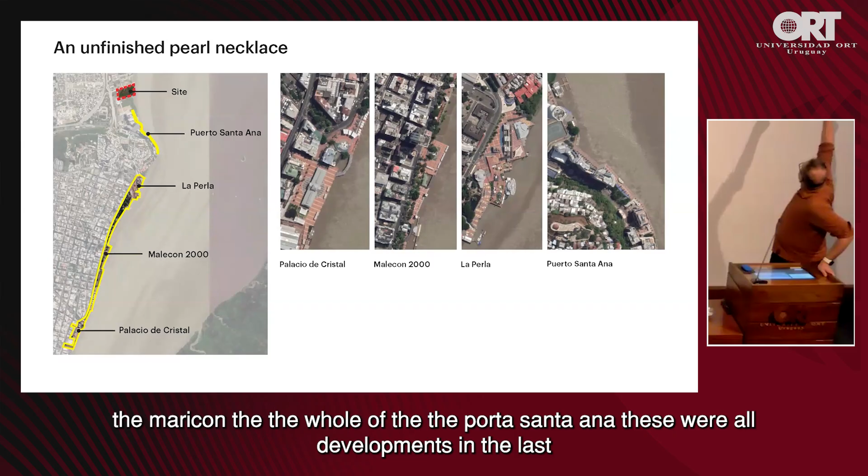These were all developments in the last 50 years on the riverside, and we have a new site, and it's all nice, but if you look at the Puerto Santa Ana, we're not happy with the result. It's stony, it's a bit boring. How can we improve that? So the client made a new master plan for the extension of the promenade, and we were then asked by the client to be the first building inside it.

Looking at the project, we of course have a lot of ambition that we wanted to reach. But we also looked at what drives the design for this project. In the end, we want to make a colorful, sustainable, and safe community, because it's a fantastic place to be and to live, but it's also one of the cities that is fantastic but also terrifying sometimes.

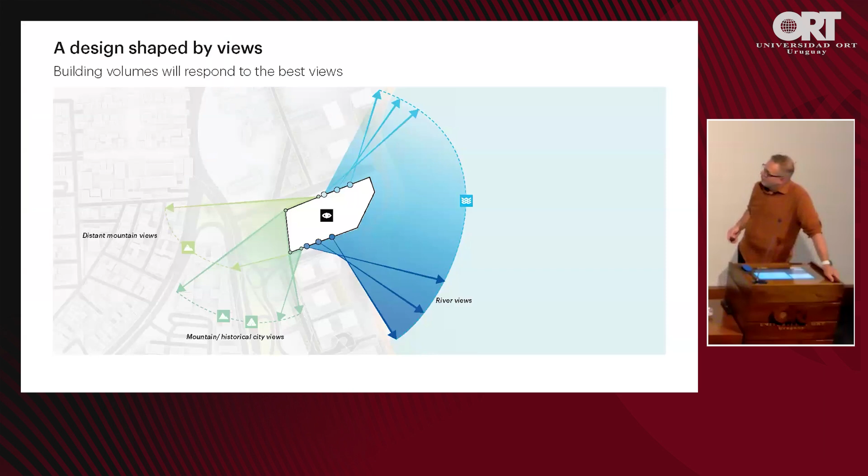So we designed buildings shaped not only by views, but also by sun. You're on the equator there, so we actually had sun from both sides, and that was something we needed to take into account. Think about how the low sun and the high sun work on these buildings, but also wind - how can we use the wind to cool it, but also protect the courtyards and inner spaces from the wind. And with this, we also needed a lot of parking.

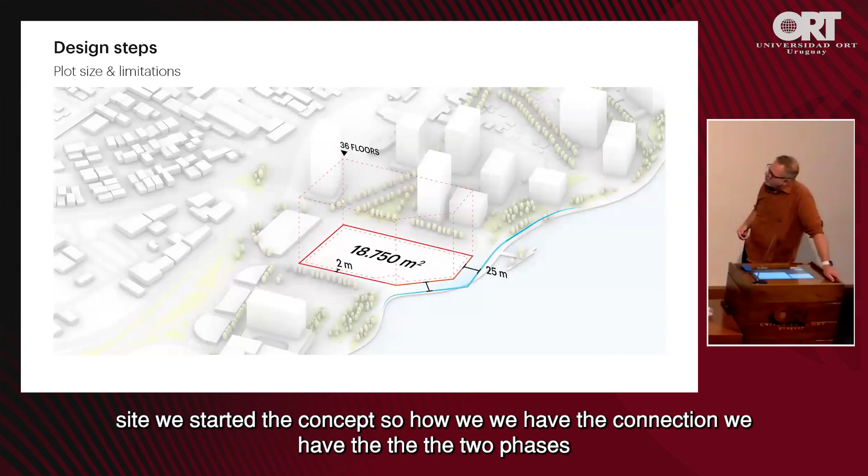How can we hide that? So we have parking around, or a program around the parking to hide it. And then also make sure it's a very connected site. We started the concept, so how we have the connections, we have the two phases that we're going to build it in.

And from that, we looked at the amount of program that we needed, and from that on we started shaping, looking at where we need the amenity so that it's central, where we want the residential and how much, and how to make sure people in the back can also see the waterfront. So we started lowering the towers.

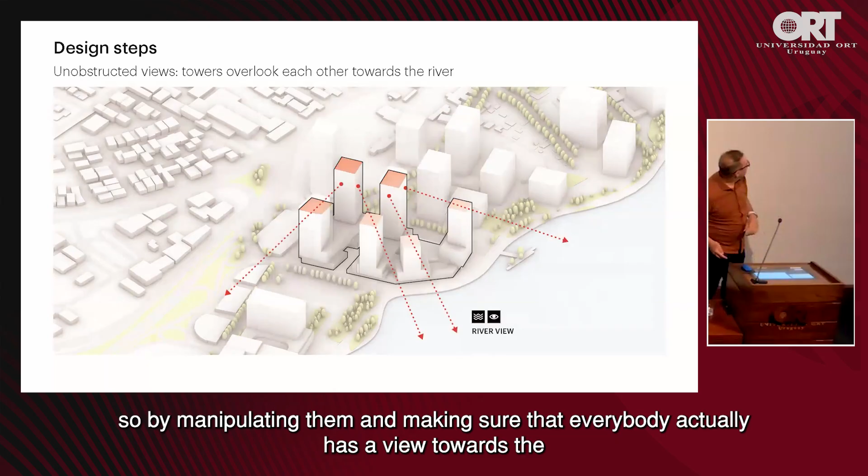And of course, our client in the beginning said no - that's prime real estate, the first tower is the one I'm going to sell the easiest. But we said you also want to sell the fourth tower easily. So by manipulating them and making sure everybody has a view towards the waterfront and the river, but also the mountains and the old town, we could optimize the amount of buildings.

And then by terracing down, we not only create a lot of terraces, but we also help mitigate the wind coming down from these towers.

Even more wind optimization was done by just getting the hard corners out on the inside. And then we looked at the colors, and we wanted the building to change color and become lighter the higher it went - starting with earth tones, and when you go up it becomes almost white.

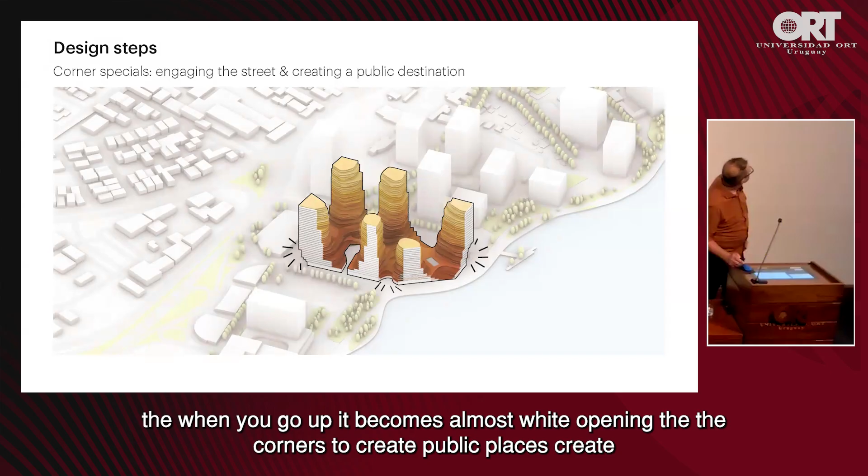Opening the corners to create public places, public destinations, but also to make sure the whole plinth feels like a safe space if you walk around there in the evening. In the end, we created this green landmark, really an ensemble inside on the river, with a very strong identity.

We're currently building the first 4 towers. The 2 last towers we already changed again - we're not going to build 2 towers, but redesigned it because they found a client who wants to do a hotel, so now it's going to be 1 tower. The nice thing is it's a little less program - we could actually do it better, and optimize views and wind even more for this whole development.

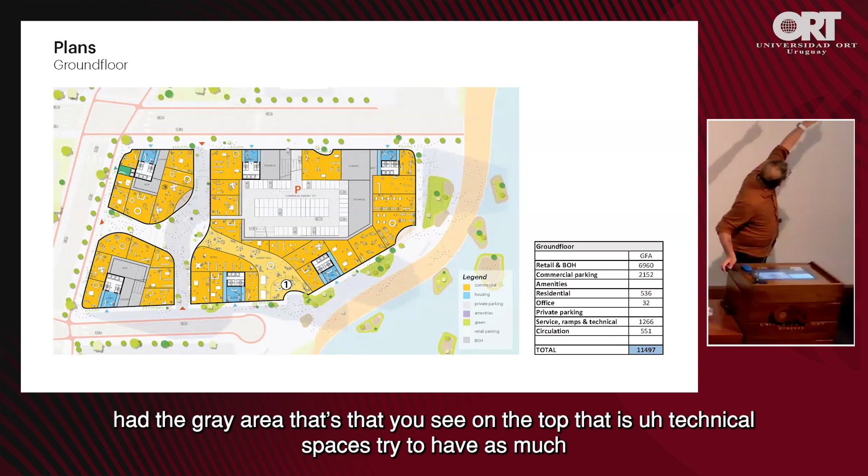Here you see the ground floor, where we really try to minimize the impact from the parking and the gray area you see on top - that's technical spaces - but try to have as much open space and retail on the ground floor as possible to really make sure the building connects to the city. This is the entrance to the mall that's there.

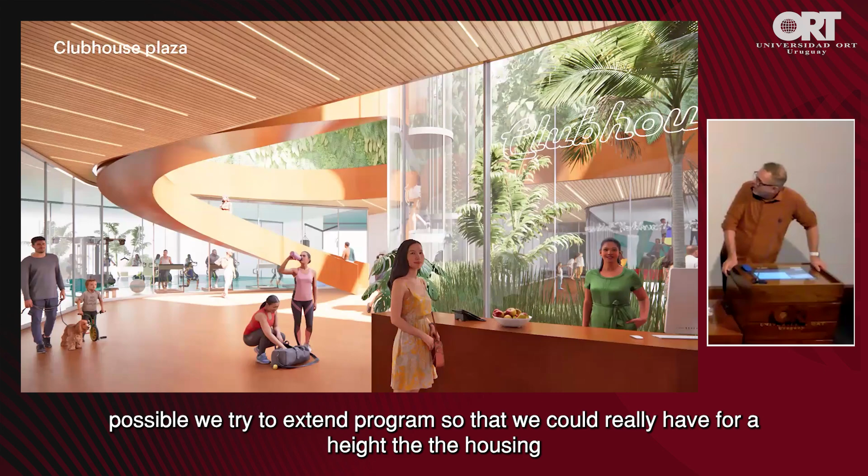The mall, and then if you walk around you have this open space, plinth, connections towards the housing and retail spaces. Going up, you have the clubhouse and the amenities, and above that the parking. And you see, where possible, we try to extend the program so we could really hide the housing as much as possible.

And then going higher, you see the amenity, the outdoor amenities, and the plants that go up. We try to make it as green as possible, but what's very important is that we wanted plants that sustain there, so we really looked at local vegetation, the plants that grow there.

If you look at outdoor amenities, we really looked at where and how to put them. We did a lot of solar studies - where there's the most solar, I want the swimming pool; where there's shade, I'll put the tennis court - really optimizing this floor based on the amount of solar and shade there actually is.

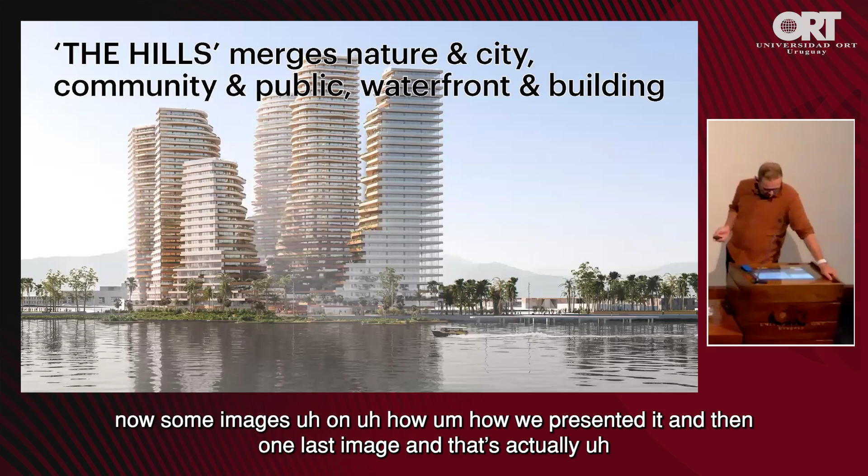And then the last project, and that's here in Montevideo. I thought it was interesting not to just show the project, but show a little bit the booklet that we presented towards the city. So it's more than just an explanation of the project, it also shows how we presented this whole project towards the city.

And then what we say is, if you look at the topography, it's natural, but it's also very urban. Montevideo is dense, but also very generous with space. It's specific, but also very generic. So what can we add to that?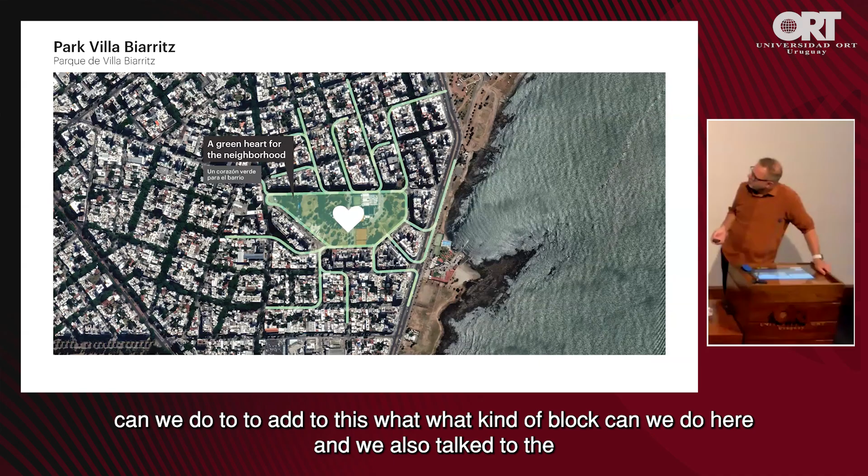So the project is in Parque Villa Biarritz. We're on this fantastic green heart in the neighborhood, and we thought, what can we do to add to this? What kind of block can we do here? We talked to the client, and he said, looking at the park, it's really a place where people go to sports, to relax, to enjoy. If I look at the people I would love to have here, that would actually be families.

This is how we looked at the site, if you look at the presentation. It's on this corner, we check how it's connected, where do you see it from. It's really visible from many points, you directly see it from the Rambla. This is all the analysis we did and presented to the city to convince them why our project is going to work on this location.

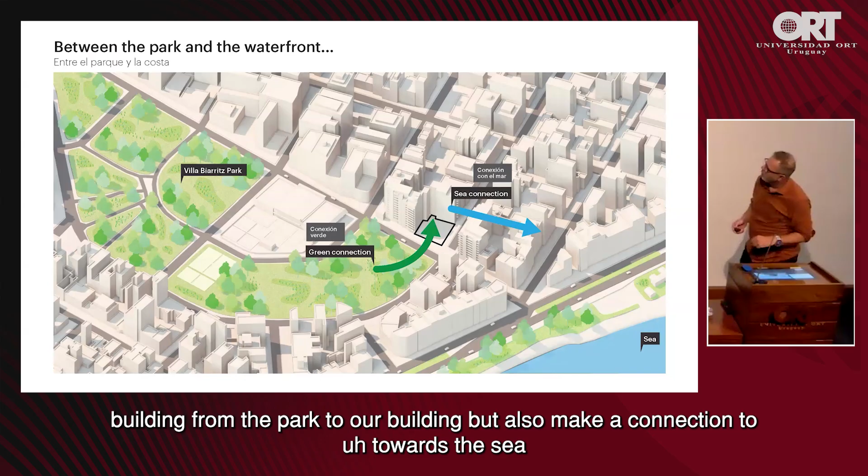And we thought, how can we make this green connection inside the building, from the park to our building, but also make a connection towards the sea. How do we create this residential building that responds to this fantastic site? And this was the program we had: mostly housing, a bit of amenities, and rooftop amenities.

Then for the concept, I think this was one of the most important things. The client said, I actually want to have people with children stay in the city and not leave. What we see now is that as soon as people have children, they leave the city. How can we keep them? So our idea was, let's take the quality of a nice suburban villa or house where you have a lot of green, and put that into the city. And how can we do that?

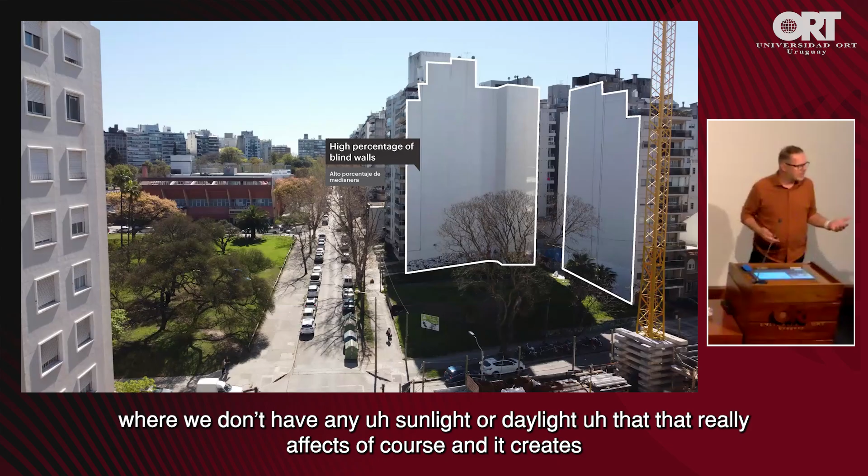Looking at the site, we're quite limited. We have two big blind walls where we don't have any sunlight or daylight. That creates a unique dark zone, and that doesn't help us. We try to solve that by introducing a patio so light really goes deep into the building. That's not only light, it also helps with the climate, because air comes in. You can use it for cooling, or for all kinds of other elements.

So we started with this base volume, 11 levels, quite similar to every other building you have here in Montevideo. We raised the floor-to-floor height a little bit to make it more generous, we wanted more quality. We took out the core and added it on top, so we still have the same amount of program.

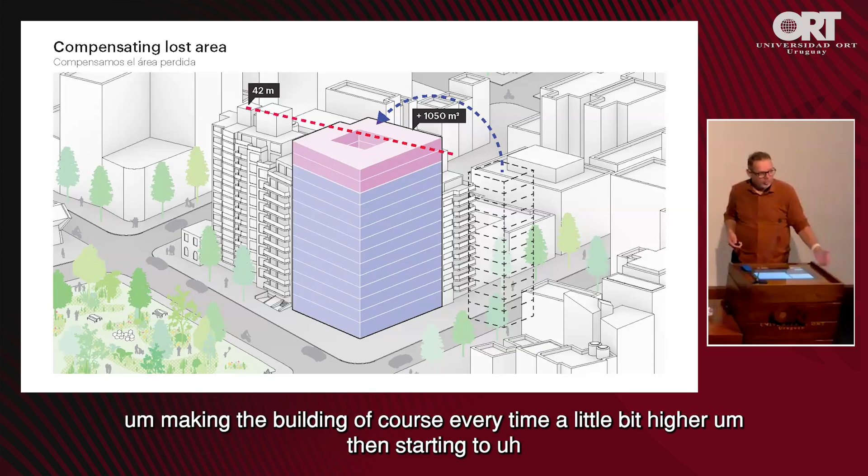Making the building, of course, a little bit higher each time. Then starting to push out the facade to create some extra square meters. With these square meters, we could then push in the facade at other places to create bigger terraces, but also start taking out blocks to create communal spaces inside the building.

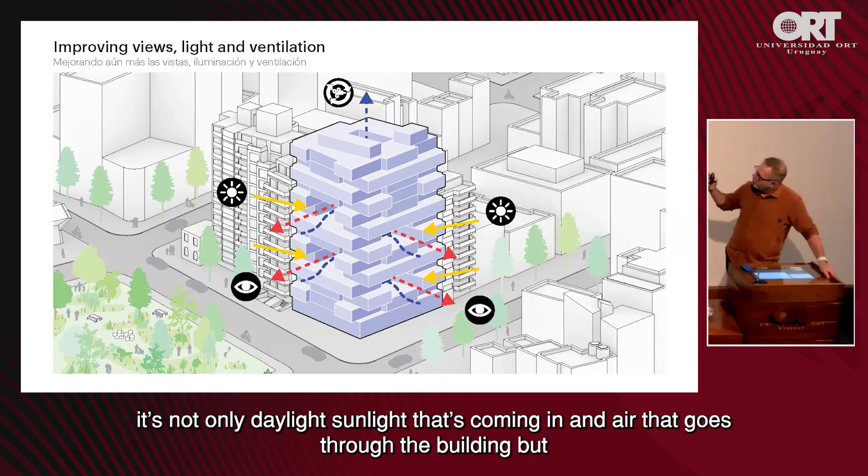Having double-high spaces inside the building where people can come together, where you can meet your neighbors, where we can have additional program. And importantly, with these patios, or openings, that we're creating in the building, it's not only daylight and sunlight coming in, and air going through the building, but you also create vistas from your house, from these places outside.

And with the facade design we also wanted to express that these are individual units. And also, since it's connected to the park, we make sure that you have balconies where you can have plants, but also in these bigger openings create the possibility to have bigger plants.

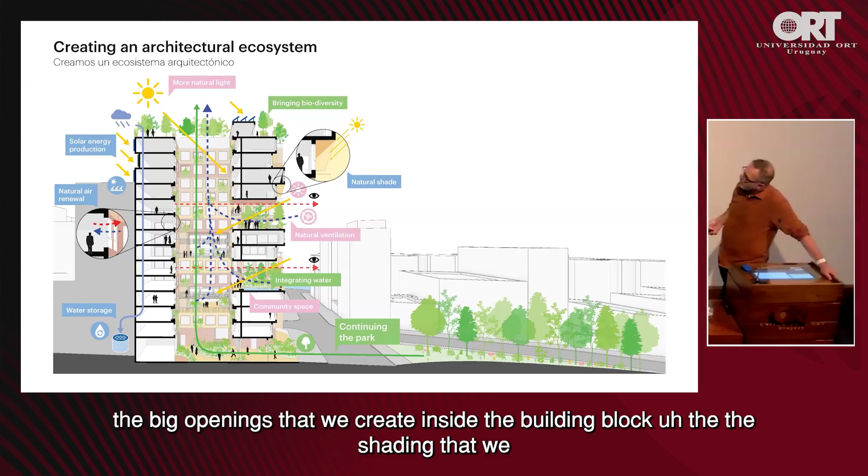This is the section showing how it works, how the air comes in, the green, the continuation of the park going up, the big openings we create inside the building block, and the shading provided by the overhangs.

If you then look at the design of the building, this is how we present it towards the client. On the ground we have 2 levels of parking. You go in with a lift.

Actually, they're changing it now because they added another building close by that didn't have enough parking, so they started to dig a little deeper than was allowed. That's also why it took longer to get final approval, because the city said that's okay, you can have more parking, but then lifts don't work anymore, so you need another system. We had to redesign this during construction.

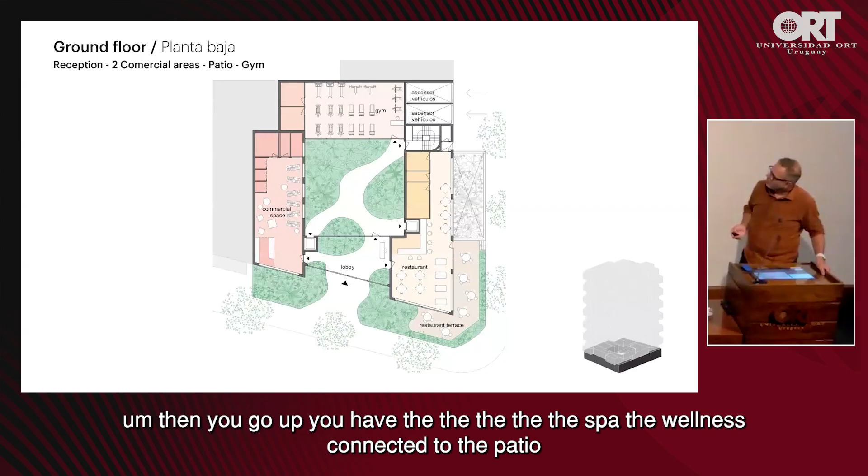Then you go up, you have the spa, the wellness, connected to the patio, and then you have the entrance level, the ground floor, on the corner with the fantastic restaurant that will be there, the entrance that you walk into, with direct access towards this big patio, and then you step into the elevator towards your house.

To make it a bit simpler, we actually started designing blocks, so not every floor is unique. We designed a couple of blocks that we just repeated, to make sure it looks fantastic but also needs to be buildable and affordable, and especially structural-wise, everything needs to stack on top of each other.

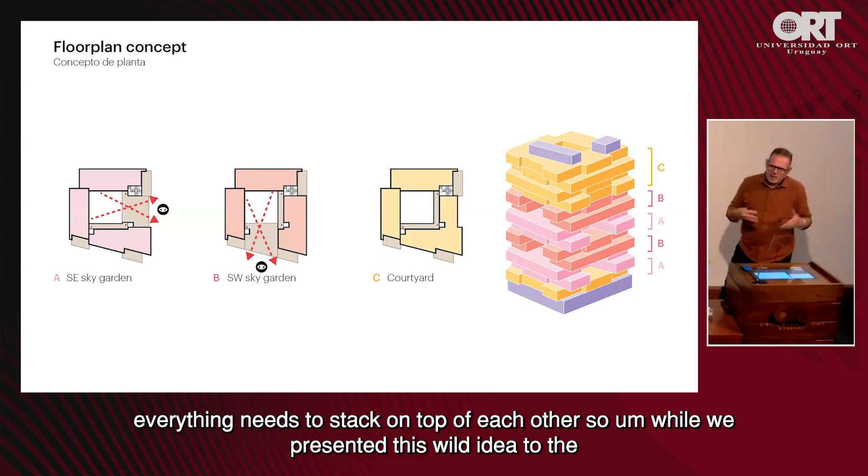So while we presented this wild idea to the client and he fell in love with it, he was also quite clear: how are we going to build this? So we really started looking at how we can repeat elements, repeat floors, so it becomes easier, and we can also repeat the whole structural system.

Here you see some of the floors that are there. You see there are 3 to 4 bedrooms per house, big outdoor spaces, communal outdoor spaces, nice terraces for everybody. These bring natural light all the way towards the bottom.

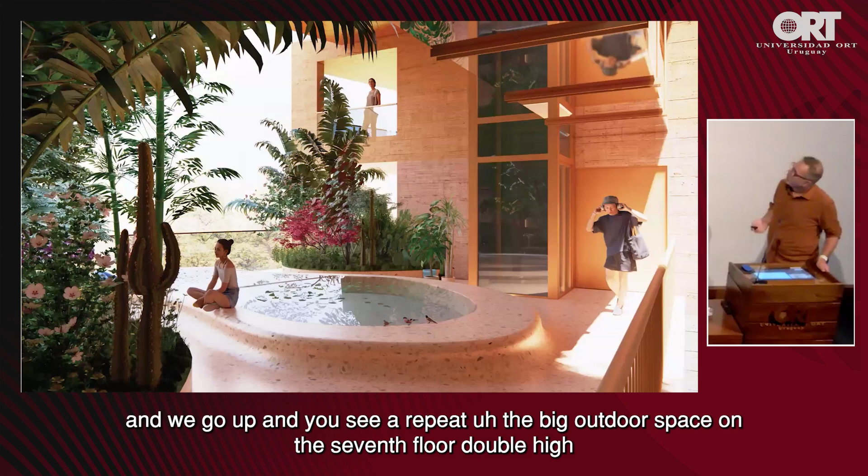And we go up, you see a repeat, the big outdoor space on the 7th floor, double high, with again a communal terrace.

All the way up towards the top, some of the houses even become a little bigger. Then you get to the top floors where it's actually only a patio for the last 4 floors, because we didn't need a side opening for daylight, since all the daylight comes from the top for the bedrooms.

And then you get to the all-important rooftop with the swimming pool, but also, of course, the barbecue. That was made clear in the first meeting we had.

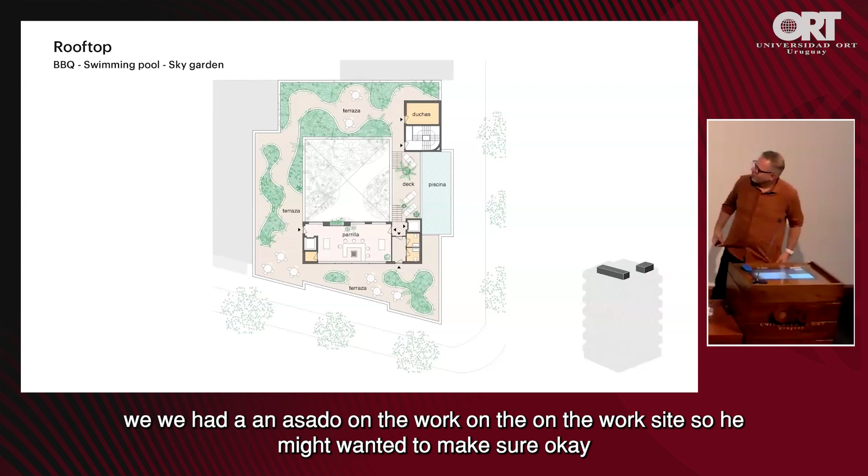Our client took us to a couple of their buildings. They showed us directly the rooftop and also the swimming pool with the barbecues. We had an asado on the work site, so he wanted to make sure: this is how we live, and this is one of the most important things, and to make sure it's there and you can use it.

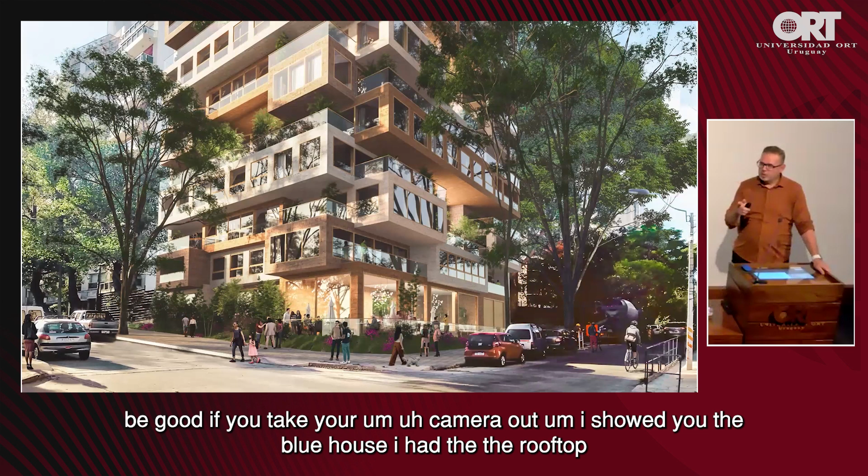And then that's it. Oh, one more thing, it would be good if you take your camera out. I showed you the blue house, the rooftop extension. This is one of the smaller rooftop extensions we did. We also did, and I think you were there at that moment, a huge stair in front of the station of Rotterdam.